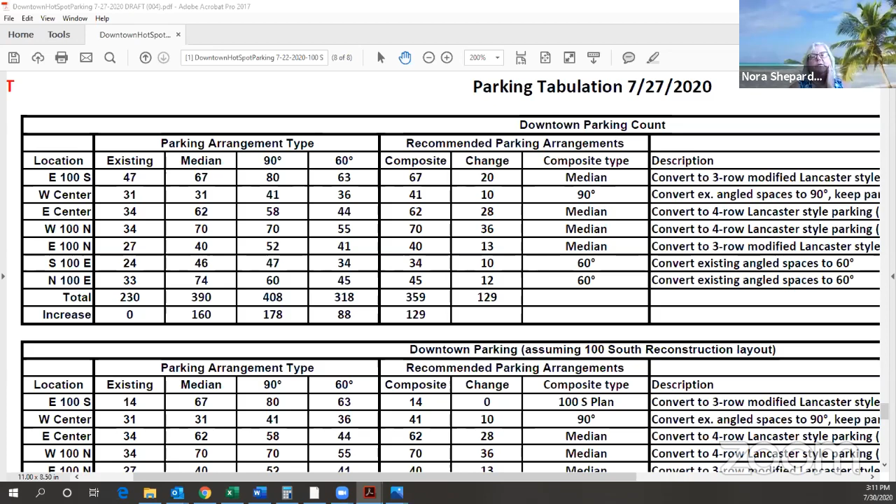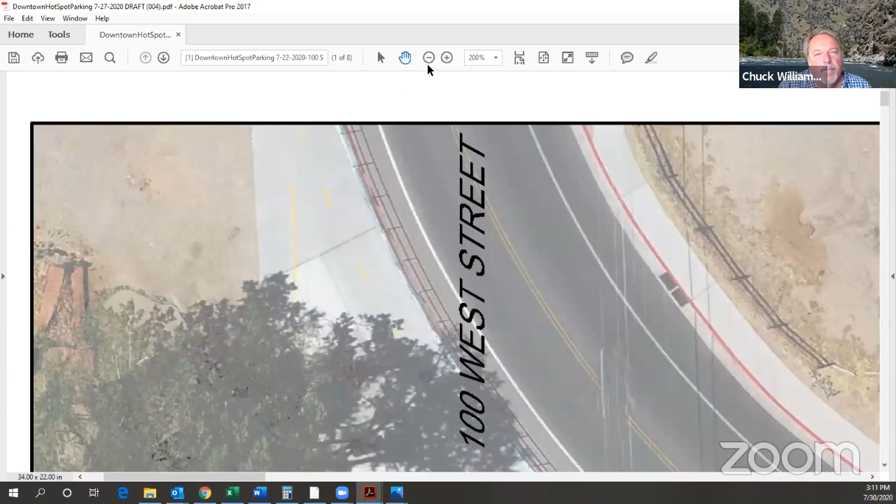Here's 100 South, Chuck, east of - we're still just seeing the parking tabulation chart. Oh, okay, I can fix that. Thank you, Nora. I have too many windows open. My apologies for that.

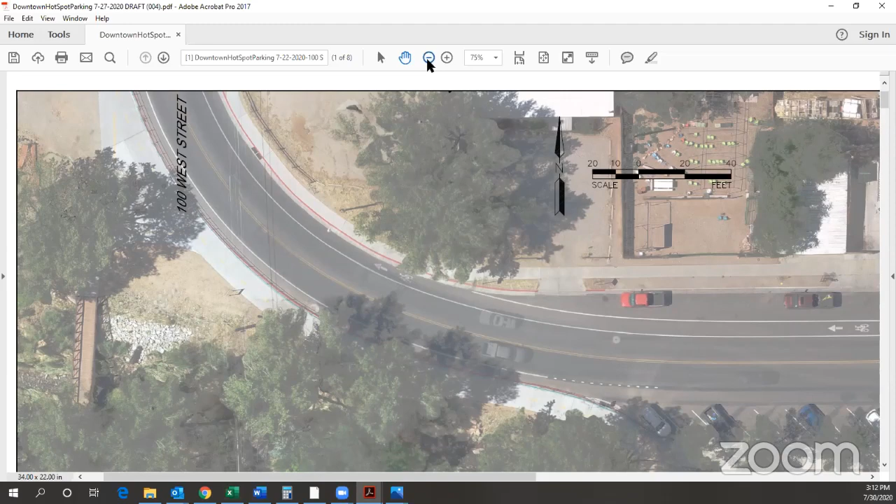What do you see now, Nora? It's the 100 West Street corner. 100 West to 100 North, or 100 South to 100 West. Great, thank you.

So now you can see this is 100 South, where I'm moving my cursor at Main Street, east of Main Street. The thing I'd point out, as we've discussed before, is here's 67 feet, basically curb to curb, which is one of the limitations on the existing conditions, and these streets vary as we've talked about before.

But we tried to maximize. We left this area free and clear for turning movements, ended up with median parking in the middle. There's not a lot of driveway conflicts here, which is a good thing. And then parallel parking on the north side of the street, and there's a setback from the crosswalk here over at 100 East.

Chuck, that 12-foot dimension for the drive lane, is that from the lip of gutter, or is there any shoulder between that lip and the lane? It's lip of gutter. Yeah, and I'm okay with that, I just wanted to clarify.

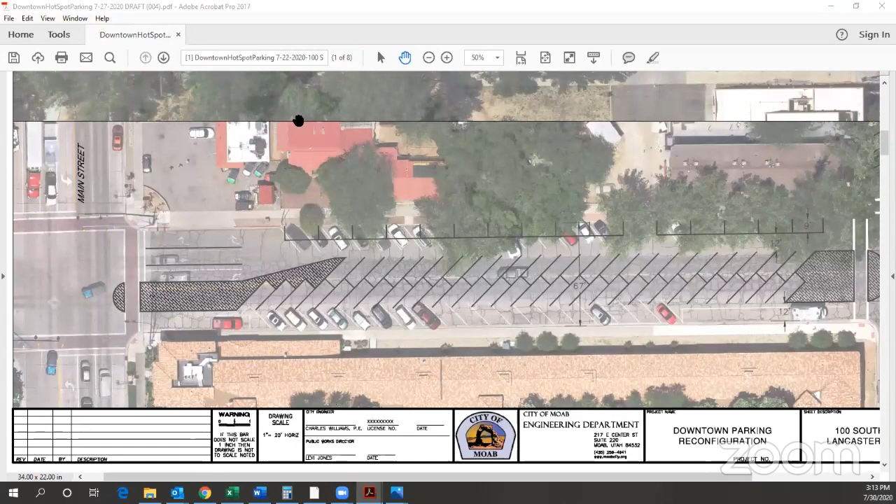And is the setback from the crosswalk to the east for any particular reason? Yeah, it has to be 20 feet per state code. So Chuck, are you taking the parking off of the south side of that street then? Yes, in order to make it fit, because of the 67 feet, there wasn't any room for anything else without going in and moving curb lines.

And on this side of the street, this is the Greenwell Inn, that'd be very difficult to do. And I'm not sure there's much opportunity on this side, but we were going to look at that if we continue moving on this, if you'd like us to.

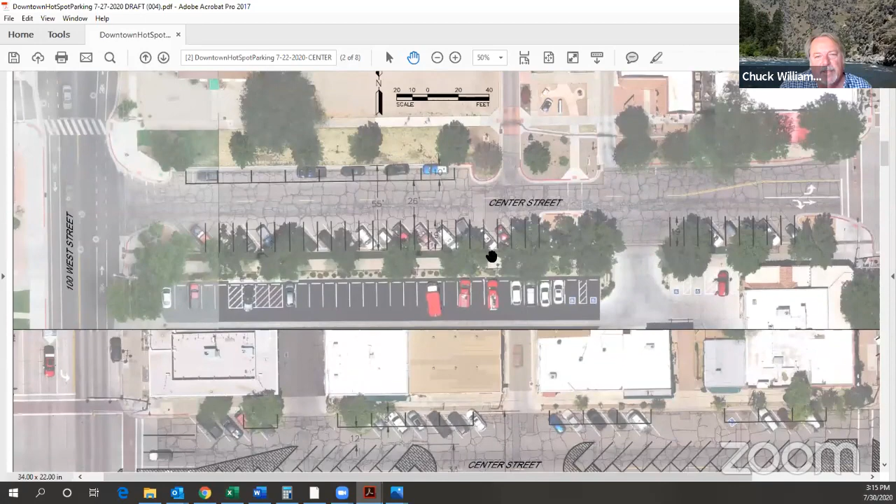The thing about 100 South is that we have currently designed an infrastructure project that is storm drains, sanitary sewer, culinary water, and green infrastructure. And so we looked at, I think I included that. I just want to explain it to you. That's what these sheets are down here that look a little different than those other sheets.

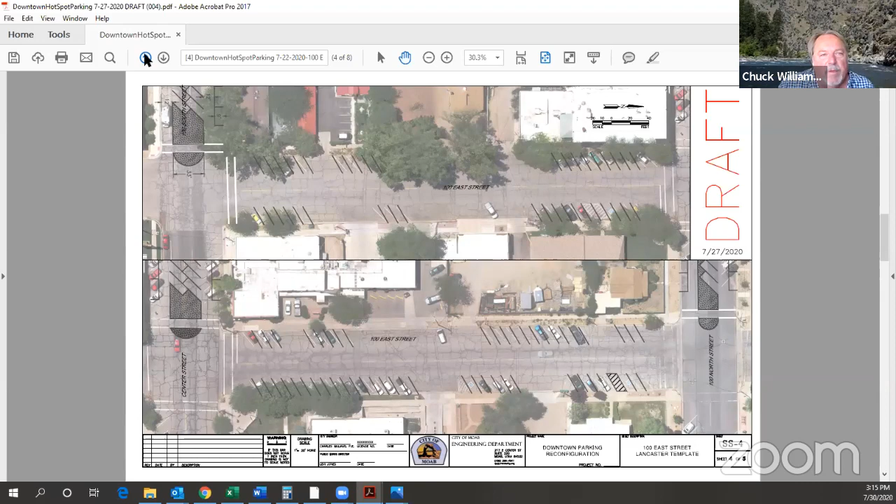These are our 100% design plans for the 100 South reconstruction. And if we went with that alignment, which had some bulb outs in it and some, at that time, back end angle parking, but it could easily be front end angle parking now, we get a different number of parking spaces is kind of what I wanted to point out. I'll go over those in a minute, but that's why there's two different scenarios here, assuming the 100 South reconstruction layout on the parking tabulation and not assuming the 100 South parking tabulation.

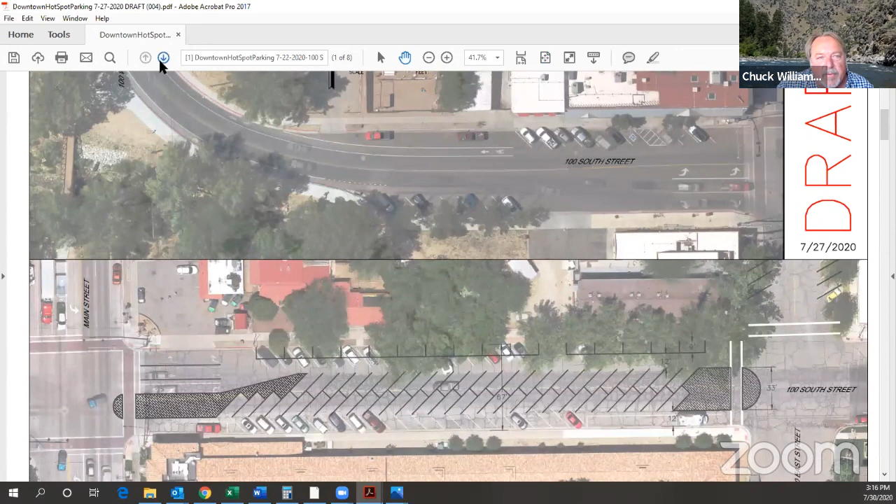So back to where we were, here's 100 South, I'll go back here. Here's Center Street, this is West Center. We went with perpendicular parking along here. Here there's only 55, 56 feet curb to curb, as existing angle parking. This part is very similar to what Matt did, went with the perpendicular parking over here, I believe, and parallel parking over here.

We talked about it, looking at seeing if some of this park strip could be used for angle parking or perpendicular parking. When we looked at it in the field, the roots seem pretty shallow, I'm not sure, there's irrigation systems, we haven't really overlain all the utilities yet. So at this point, we just put in parallel parking there for that.

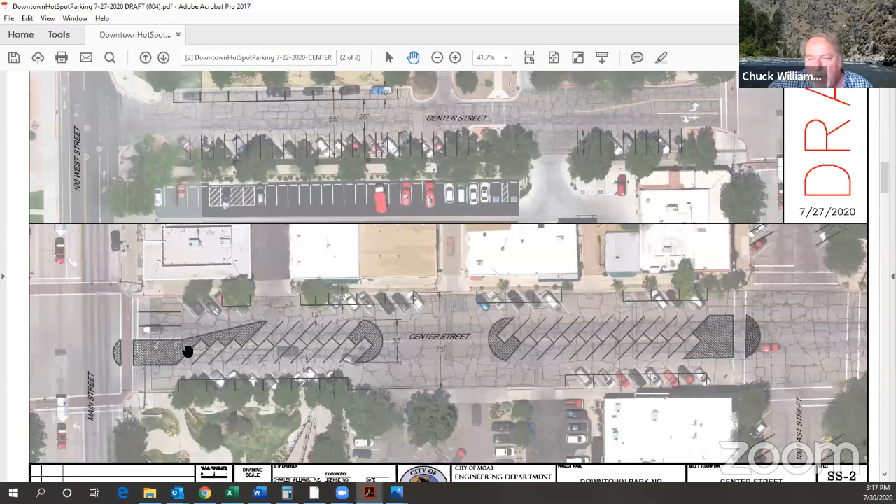On East Center, again, the setback on this side for the turn lanes. This has median parking down the middle, parallel parking on the north side, some parallel parking on the south side, but on Center Street, as a matter of practicality, this is the MIC.

I just don't see how we can avoid the fact that we need openings here. Not saying we physically couldn't do it, but I think from a traffic flow standpoint, making every vehicle that goes in here—and this has travel trailers and that—and then having them come out and go right, is something you just need to make decisions about, I guess.

But go ahead. I'm wondering if, as a compromise, the left island, the western island east edge, could be moved east a little bit, so that the MIC basically has two driveways for that parking lot. I'm wondering if the eastern driveway, which could be more the exit one, could have a left turn, and then if people happen to pull out of the western driveway, they would be forced to turn right, but presuming the traffic allows it, they could just pull a U-ey in that spot and pick up another 4 spaces that way.

It's possible, Kaylin. Again, these are such large driveways, plus there's that driveway across the street that goes back and serves the back of these buildings. We believe this is a significant feature we shouldn't ignore, because one of the issues is none of this has raised curbs. So these are potentially some type of pavers, so cars can cross it. There's nothing, so if you don't provide them a travel way, you set up conflicts where someone could drive out here and turn left right there. I'm not saying they would, but it's something you've got to consider.

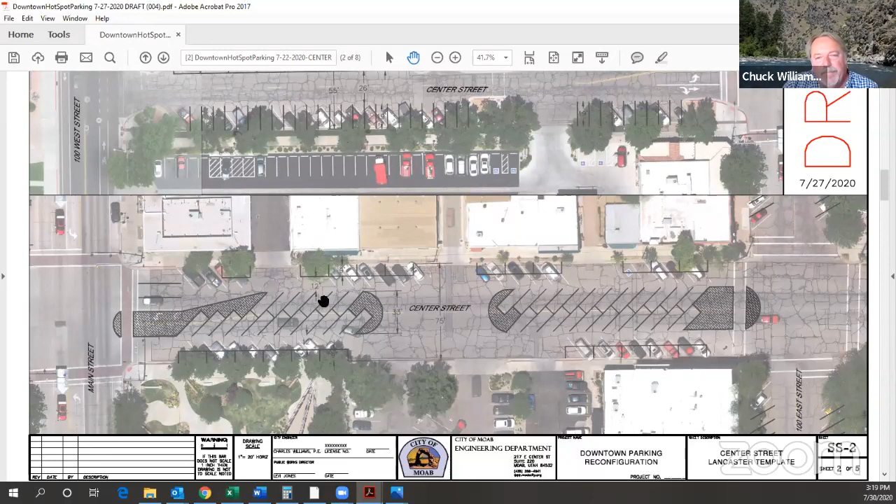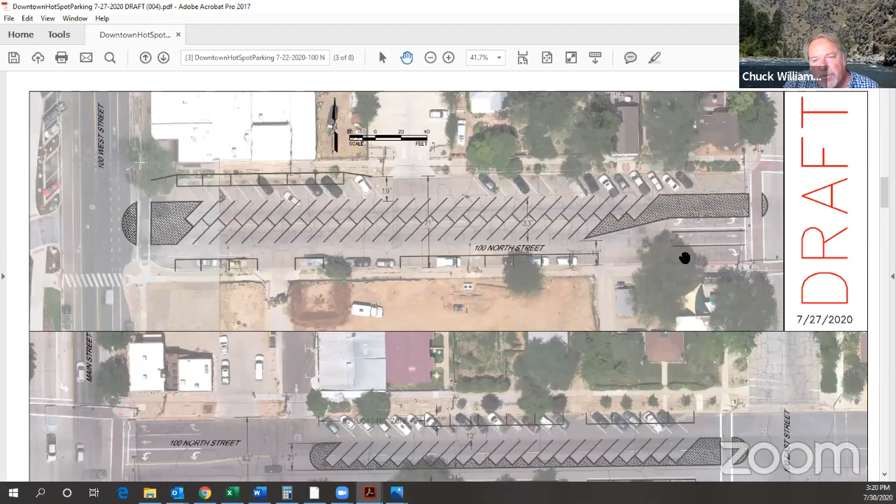Now down to 100 North Street, and this is 71 feet curb to curb. This is where we pick up a lot of spaces compared to what's there today. Here's 100 West, so this is West and 100 North. Pretty much the template fit of just angle parking and the median parking, parallel parking here, parallel parking here. You can't really squeeze in any parking here because of the turn bays, which I believe need to continue.

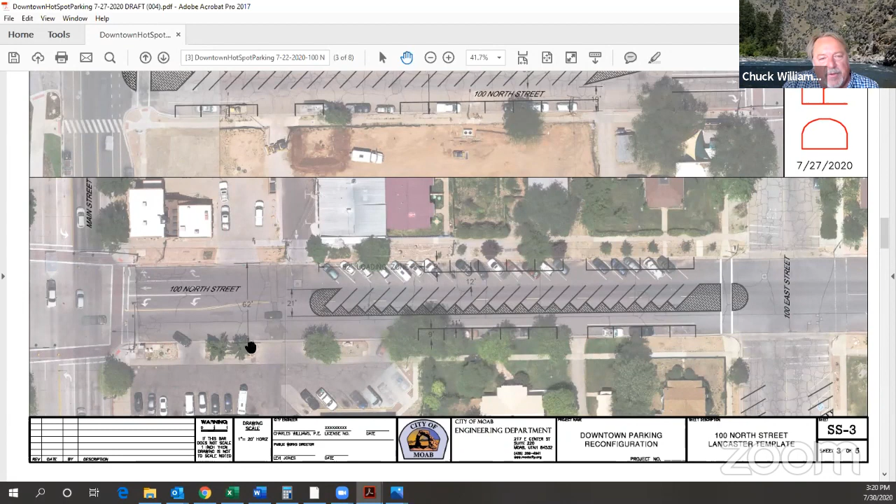Down here, 100 North on the east side, and there's only 62 feet curb to curb. And that's one of the limiters. Here's 71 feet. So when you cross Main Street, you can see by this taper here, the curb to curb shrinks by 9 feet. So there's less opportunity under existing conditions to put in parking.

Given the way we've had discussions about deliveries and how those are best handled, we thought maybe making this a loading zone might be a good thing to do for Moonflower, because they seem to get so many deliveries at that location. Then put in a single row of median parking down the middle, and parallel parking along the north and south side. But because of this 62 feet, we just couldn't fit in the full width of the double, like up here, the median parking.

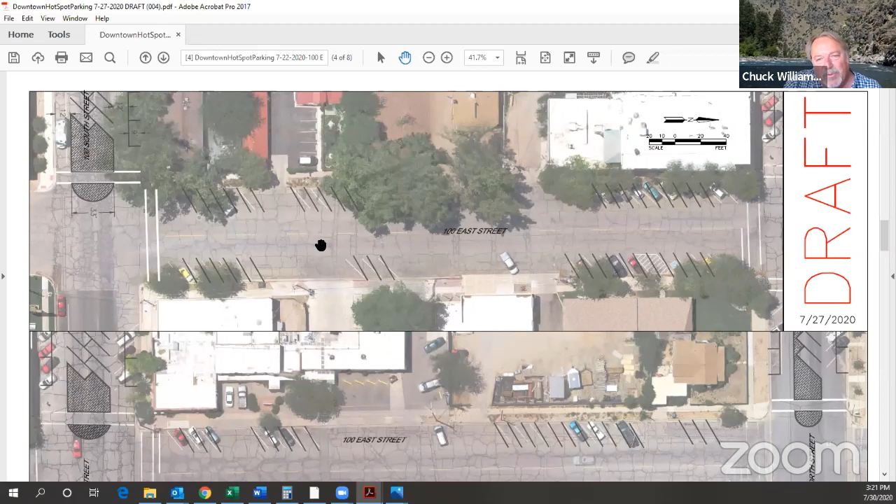Now this is 100 East Street, and here I believe this is the firehouse, isn't it? Yeah, and so these driveways are a limiting factor over here. So we went with angle parking forward, 45 degree, which gives you a little bit more space than the 60 degree. Then down here, Center Street, 100 East, angle in parking down here.

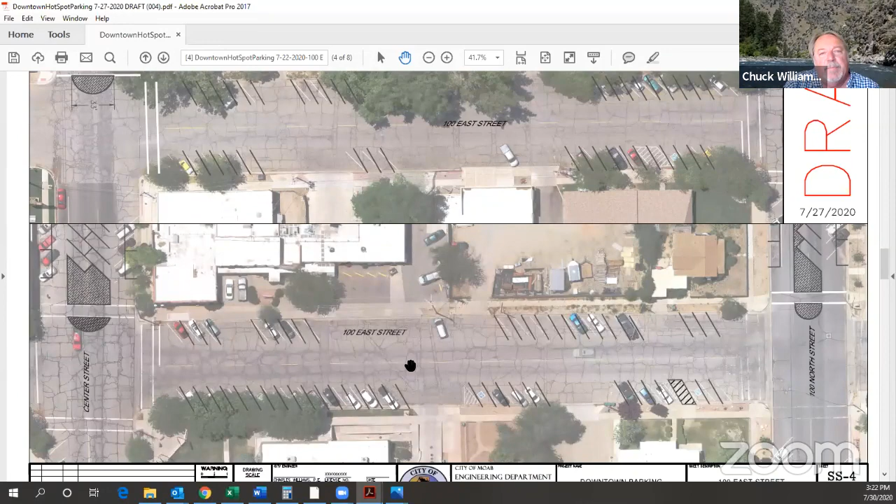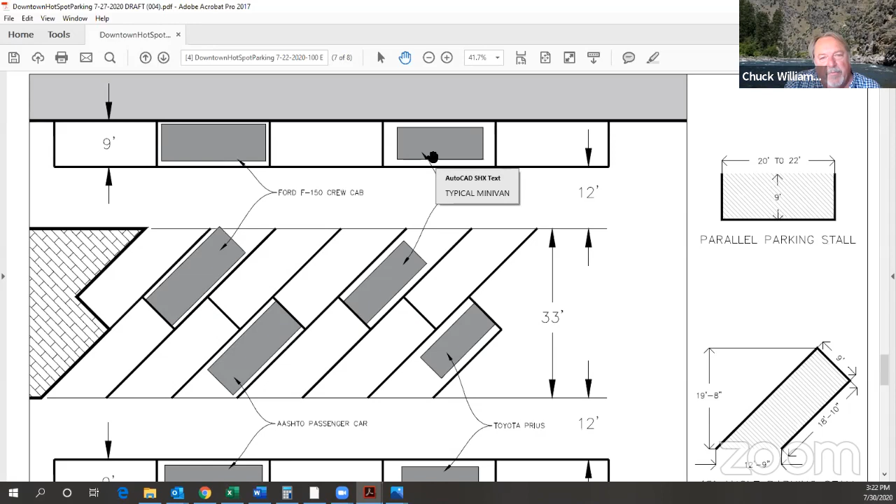So really we went at it on a case by case basis, street by street, and I'll go past that, and came up with... here's a couple of examples, and Matt has done similar, I know. A Ford F-150 crew cab, kind of the typical four-door pickup truck, will fit in this space and in this parallel space. Typical minivan looks like this, gives you a little bit more room over here. Toyota Prius, yeah, you've got lots of room. And then the AASHTO design car, which is kind of this nebulous car, probably a full-size car of some sort, fits in here.

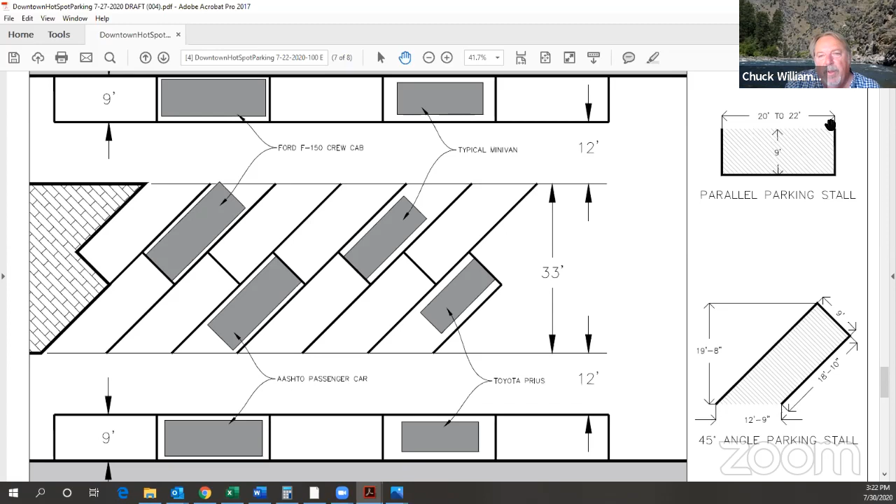Parallel stalls are between 20 and 22 feet long, 9 feet wide. The angle parking stall, 45 degree, is 9 feet wide, 18 feet 10 inches on this leg, and it goes out into the street perpendicular about 19 feet 8 inches. So these dimensions weren't evident on some of those air photos, so we wanted to point out some of our design assumptions.

So here's the tabulation that came up with it. If we focus on how this would read: here's the street, here's the existing number of spaces, this is if we just did median based on our assumptions, or just did 90 degree, or just did 60 degree angle in. But we put together a composite, which is what I just showed you. And this is the change. In all cases, there was a change in the plus.

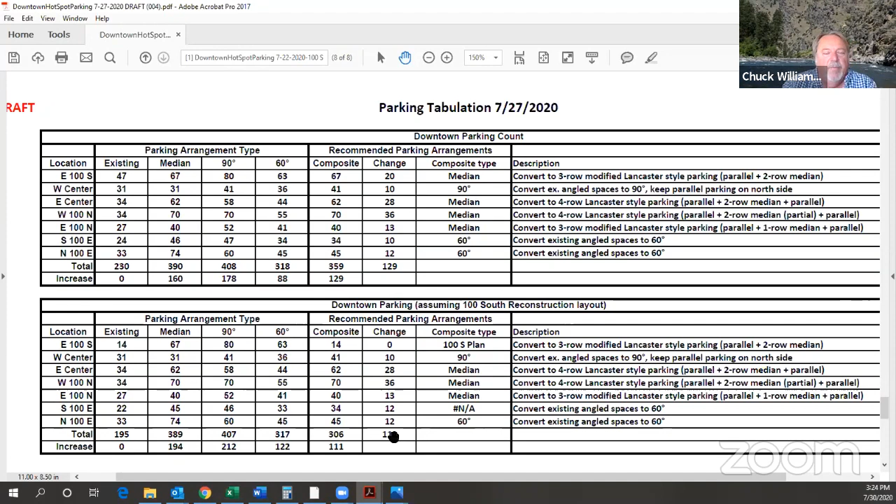If you go on a street by street basis, the one that picks up the most is West 100 North, picking up 36 spaces, for a total potential increase - let's say it is for the final one - but at least under this scenario I've just gone through, an increase of about 129 parking spaces on those particular streets. And if we were to maintain the 100 South reconstruction layout I showed you, the plans we have now, it would be an increase of 111, because the layout of 100 South doesn't pick up as many parking spaces as the exercise we went through above.

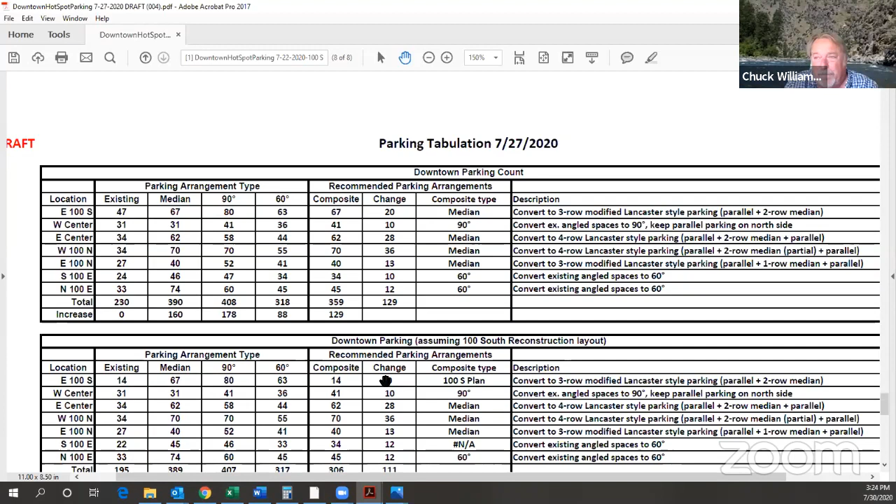So that's where we're at now. We haven't gone through as far as we intended to go by looking at moving curb lines, by looking at utilities. With that, I'd be happy to answer any questions if there are any.

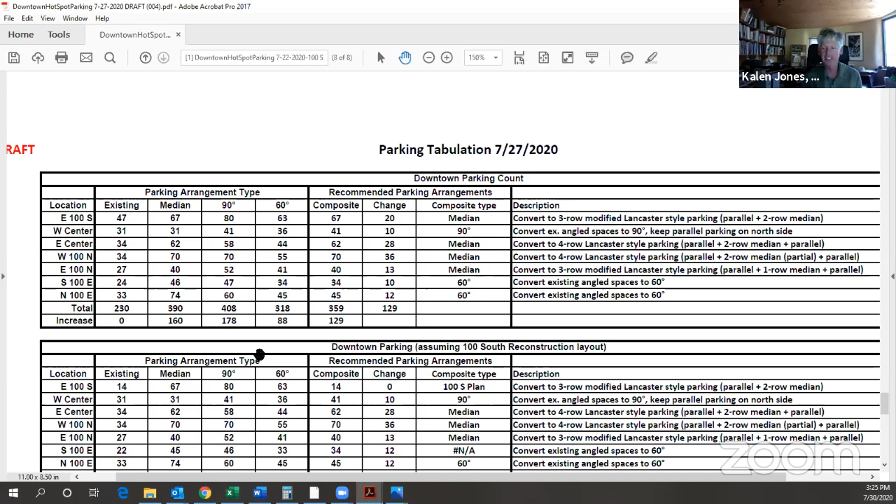Councilmember Jones: Thanks, Chuck, for all your work on this, and staff. This is great. One question about the 100 North in front of the Mark. Did you consider doing mid-street parallel parking? I ask because it seems like that could potentially be used as a loading zone.

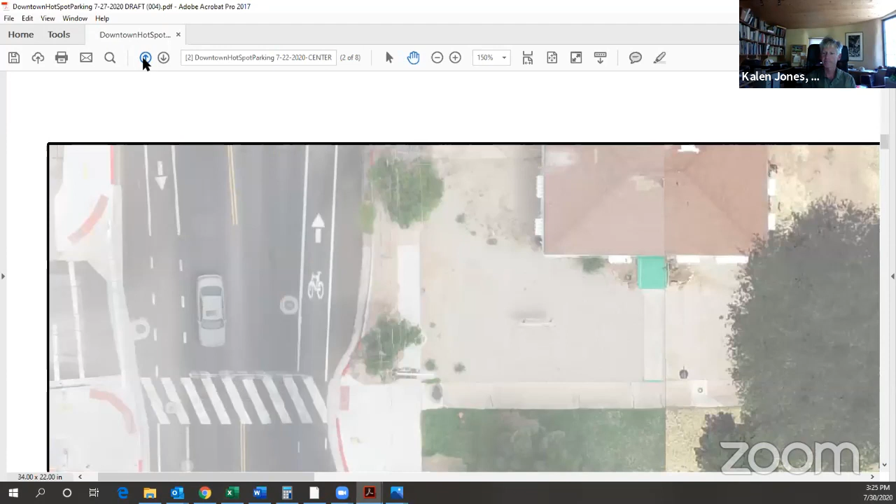Yes, we did consider it, and we didn't really throw it out, but the whole thing of car doors opening out into the street, we haven't really resolved that. Take the time to figure out those dimensions and where that would go, because it becomes almost a 90-degree extension of that 9-foot width, if you throw out the car door, for parallel parking. Not saying it isn't doable, and that's an interesting point, but we did talk about it.

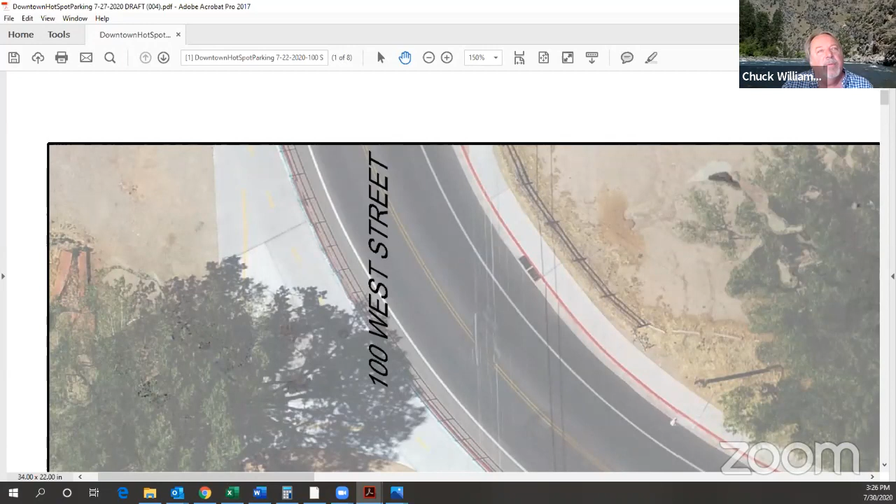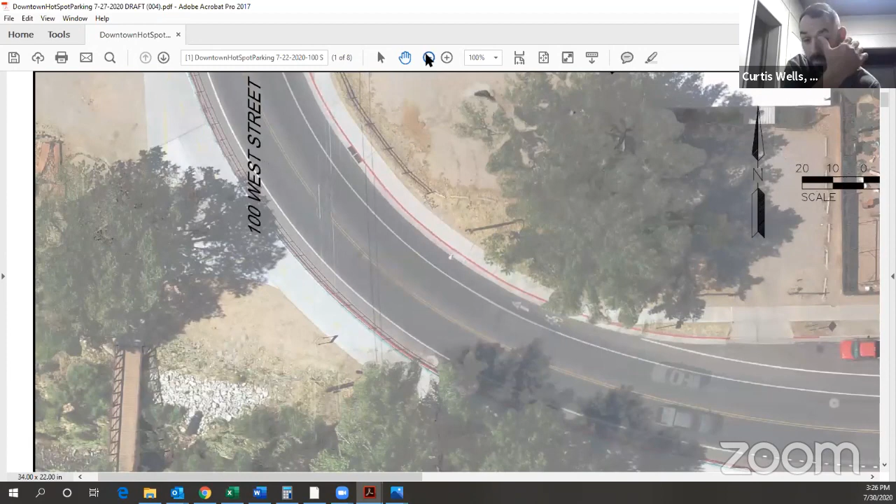I would echo that, Chuck. This is fantastic. Appreciate your work on this. Do we have another question? Yeah, I was just going to ask.

It seems like we've had some discussion about variation in parking stall width between cities. So when you were sizing these, did you take the available space and see how many you could fit? Because if you're working with a constrained space, they might end up being a little bit wider than some places' minimum, but there's no advantage to making them smaller because you might end up with a partial space on the end anyway. Did you go through a process like that, or how did you size this?

We absolutely did. That's why on width, we maintained a minimum width of 9 feet, but in some places we end up with 12 feet, because there's just that extra 3 feet, there's nothing there. And then we varied it between 20 and 22 feet in length, because sometimes there were limiting features, as you say, driveways or other obstacles that would say we can't pick that up. We picked up a couple of spaces by maximizing the length, minimizing the length on the parallel. But it's still, you're trying to make it fit into the box right now.

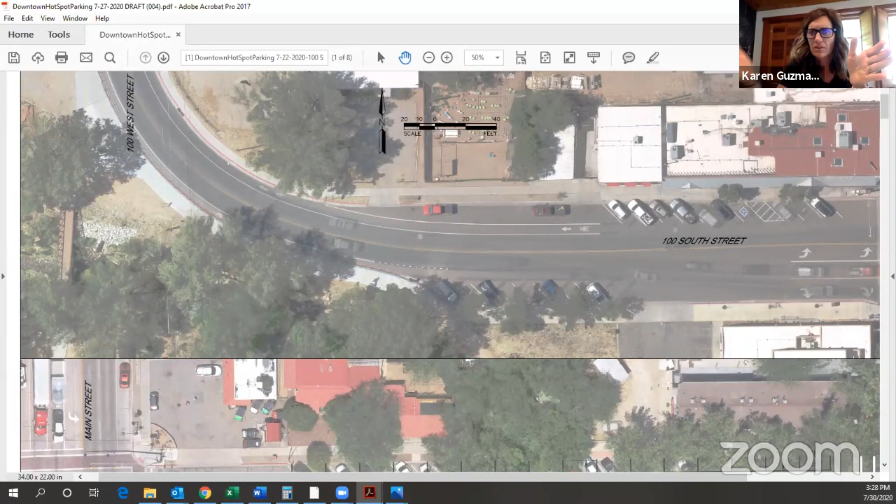Well, just real quick, Chuck, so do we go in front of the Mark? I couldn't really tell. It looks like it stopped before that. It stopped short on 100. Yeah, we only went to, is this 100 right here? On 100 North, you mean? Yes, Karen? Yes. Let me look. Here's 100 North, 100 West. Yeah, we just went up to the crosswalk that's there at this street. And the Mark is on the east of there. Okay, yeah, you're right. So we made an assumption that we basically went one block either side of Main Street.

But that's not to say that you couldn't extend it further up to pick up more spaces. Gotcha. I mean, there just seems like a high usage for residents. The Mark gets used quite a bit, and there's a need for parking. So bringing that up would be advantageous. And then on that 100 North, when we did our walk around on that first block on the south side of 100, we had all those, from the post office to the US Forest Service.

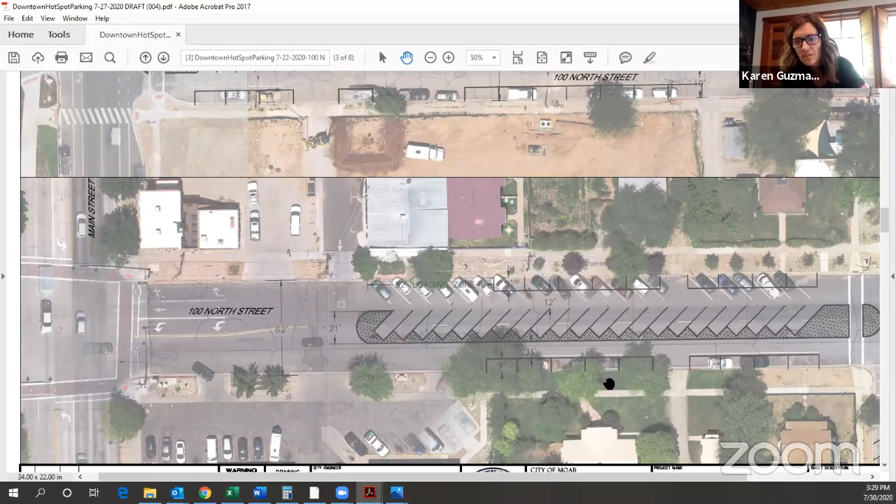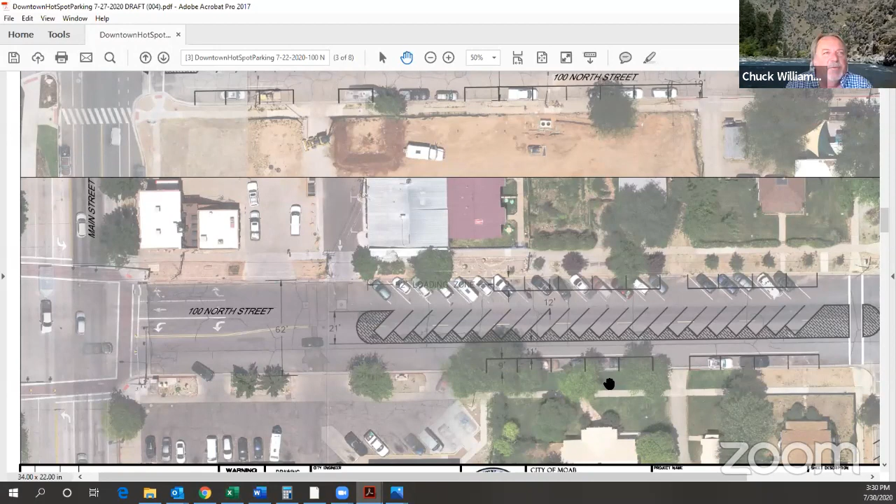Right, bringing, utilizing some of those trees to offer shaded parking without having to get rid of those. Are we going to look at potentially going in, like the same as with Center, when we did the walk around again, it looked like there was options to make that a little deeper, if we're so inclined. Yeah, this is still a work in progress. We haven't gotten to what I would call the 100% set. This is maybe a 70% or 60%. We've looked at a lot of the constraints now, and yes, we would, to answer your question directly, we'd be looking at that.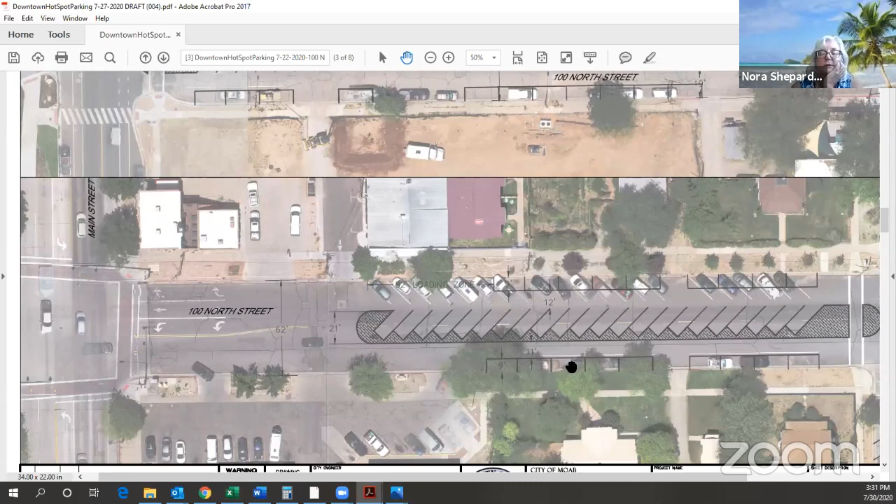Seeing none, thank you again, Chuck. Progress looks great. I definitely think the concept so far is in direct alignment with what the group had envisioned and a lot of the feedback we've gotten from the community. Appreciate the good work on that. With that, Matt, I will turn it over to you.

You're on mute, Matt. No, still muted. Nope. Hey, Matt, we're still not hearing you. Even when you're off mute, we're not hearing you. Maybe leave the meeting and come back in. I've had issues with that where that addresses it. Okay, Matt has left. Watching for Matt. Matt is back. No. Not sure what's going on, Matt. We're not getting you. It's showing that you're off mute, but is there a chance you can adjust your microphone volume level? Yeah, that's what I was thinking. On your computer or whatever you're using.

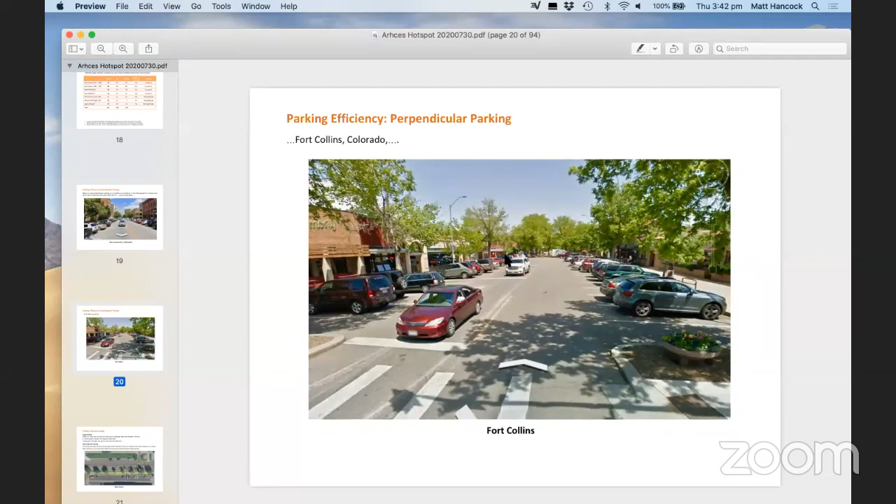I just wanted to touch quickly on perpendicular parking. It's been a while since we last met and I last spoke on it. It's widely applied in other countries I'm familiar with, and also in the United States. It has certain advantages - perpendicular parking can be accessed from both directions. Currently the angled parking on West Center Street can only be accessed in the direction of travel, coming from the west to the east, not from Main Street. Perpendicular parking would help remedy that.

The other advantage of perpendicular parking is it uses a lot less street length. It's very efficient, and it's quite well suited to this location, given that it's a low volume, low traffic street, and it's naturally bordered by these two necks, this neck here and the mid-block neck there. As Chuck has mentioned, we do have this issue with this parkway, this green parkway to the north, and whether to recess the curb or not.

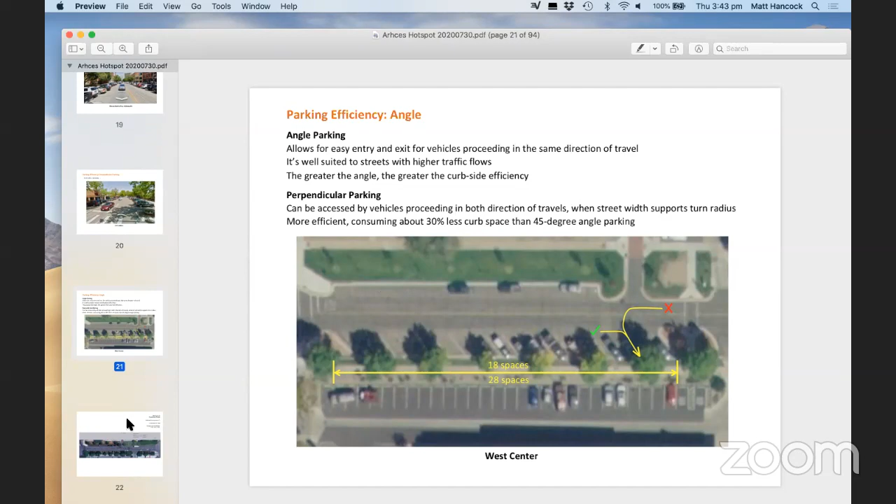If we did recess the curb, we'd increase the amount of additional parking quite substantially. So I sent through, as part of the submission, the PDF files. They're a bit awkward to work through. I'm not sure if you'd prefer me to go to the SketchUp files. It's a little easier to navigate, but it might just be best to stay with the PDF file.

Can you all see that? I can't. Yes, you're going to have to give a thumbs up. Great, thank you, Nora. Thank you, Karen.

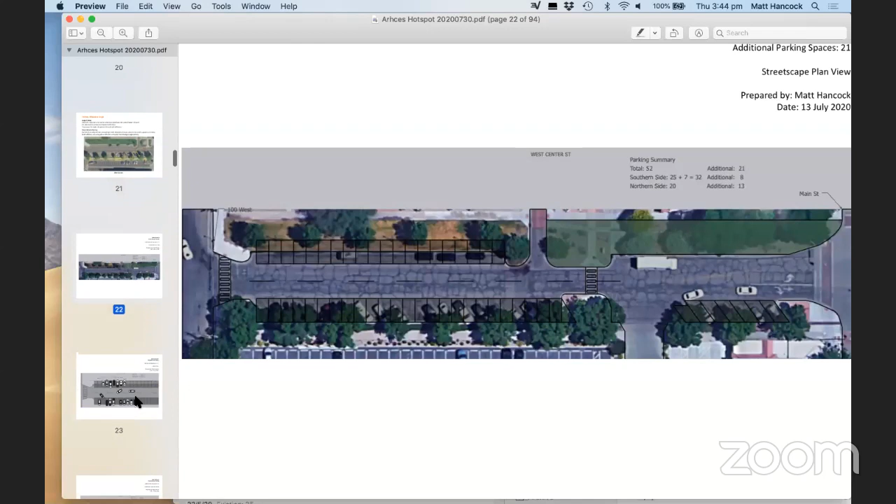It's all quite well spaced. Chuck has looked at a number of vehicles. We imported a number of different vehicles into our model. This is a Ford F-150. We looked at Ford Explorers, and we did this for all of our streets just to get a good look at turning geometry and spacing.

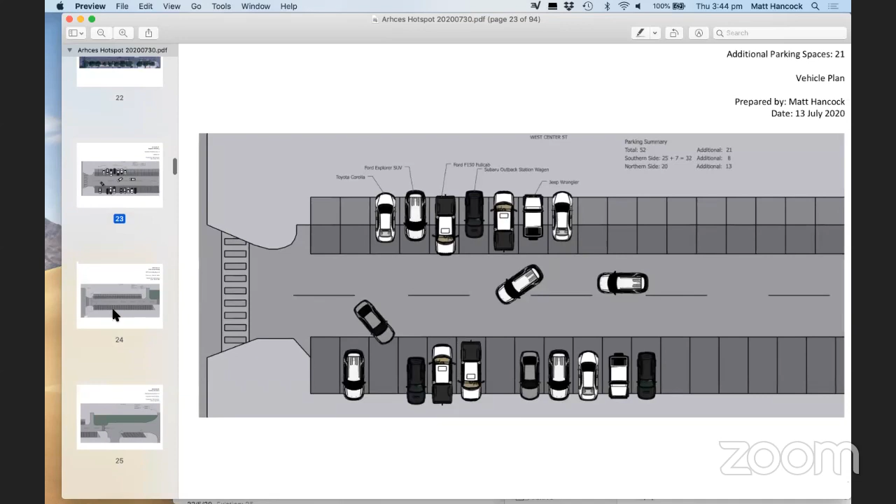And I'll move through this quickly. In fact, I'm going to change and go to the model instead, it's much easier.

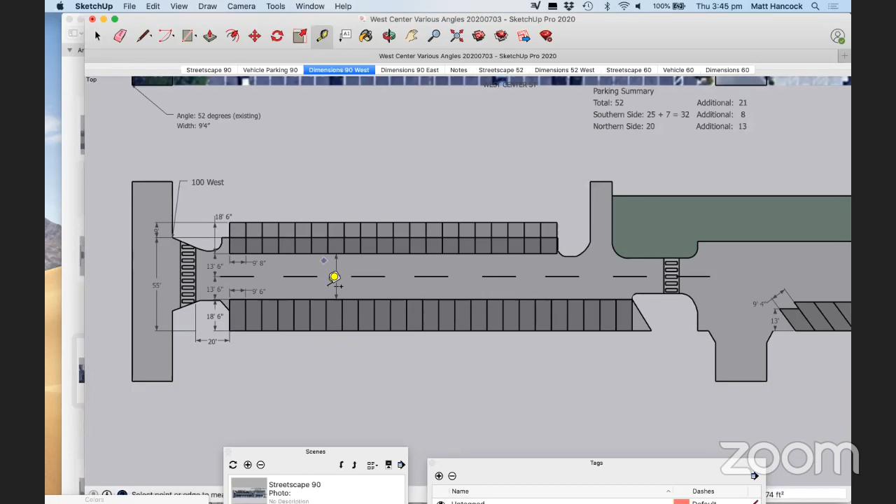So what we'd be looking at in terms of perpendicular parking, we were able to fit in a number of additional parks on the southern side using generous spacing of 9 feet 6 width, length of 18 feet 6, which is larger than the city code, and a distance between those perpendicular parks of 27 feet. Based on roughly these dimensions, we would have to recess the curb on the northern side by about 9 feet, which would all add up to an additional 21 car spaces.

If we were to tighten these dimensions up - 9 feet 8 on the northern side, 9 feet 6 on the southern side - and reduce those down to the minimum code of about 9 feet 1 and 9 feet, we get an additional 2 spots, for about 23 spots total for West Center. It would require recessing the northern curb by anywhere from 6 to 9 feet.

Chuck has mentioned this northern parkway that sits here is very uneven. It's quite elevated. I went off and inspected it - it's about 2 feet high, and those trees would be impacted by any recess of this curb. That's problematic. I value trees. I think we all value trees.

I'd like to see if we can't preserve the trees, but I'd also like to explore moving those trees. I did a little bit of work, and apparently transplanting trees isn't too big a problem in some instances. I'd love to see if we could do it here because the benefits would be substantial. So that's West Center Street.

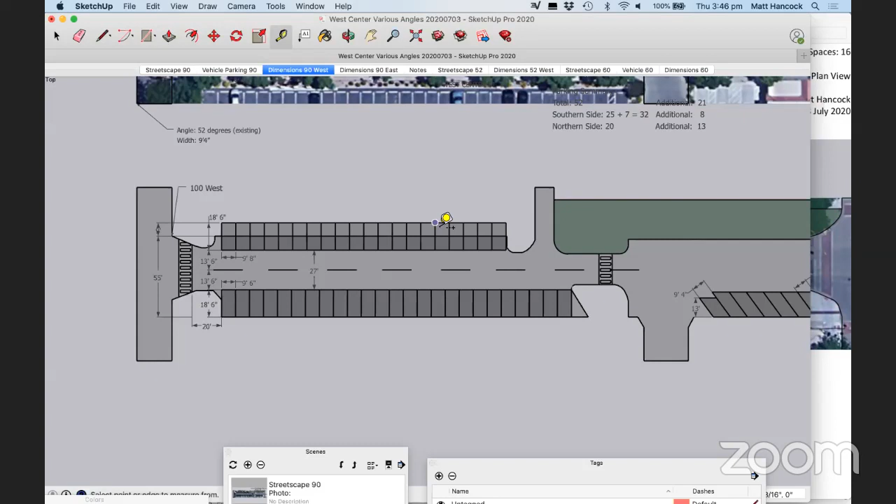It's a bit hard to talk because I can't get feedback. Should I unmute and get comments, and I'll stop speaking? Keep going? Keep going. All right, okay.

So that's West Center Street. I'll now move on to East Center Street. Actually, before I do that - I sympathise with Chuck, when you've got a lot of windows and you're trying to navigate your way through this, it is not easy.

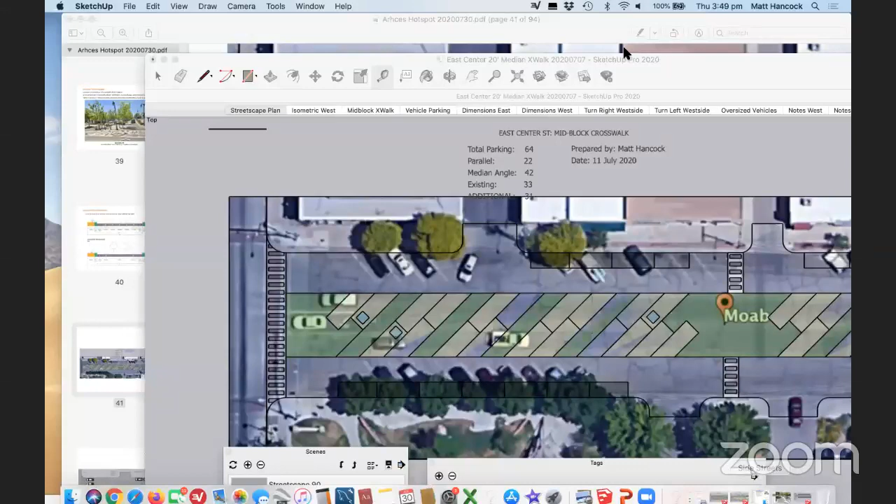I'll now flick back to SketchUp. For those who weren't in the subcommittee meeting, SketchUp is a drawing design software used principally by architects. It's really easy because you create 3D models, and from there you can just drag things around. It's great, really easy to draw things with this.

So just to give you the layout, anything that is a yellow box is a parking space. Anything that is green is a void, a landscaping or pedestrian void, not dissimilar to Lancaster. We have curb, and then we have the double end-to-end angled parking in the middle of the street. We have these voids for, if you were interested in doing landscaping.

My computer will think for a bit. These files are large. You can landscape. It's got a mid-block curb while it's thinking, and it's got parallel parking to the north. This is all very similar to what Chuck's done. I apologize for the wait.

Now, Chuck has mentioned problems with landscaping, and I acknowledge those - you've got amenities that run under the street. You do have to make sure that anything you put in the street is not going to create ongoing problems with the street itself. And of course, these are just my renderings of taking some really big trees out of a model and plonking them all in. This isn't to say what it would look like, but it is to give a sense of space and a general understanding of how things would look.

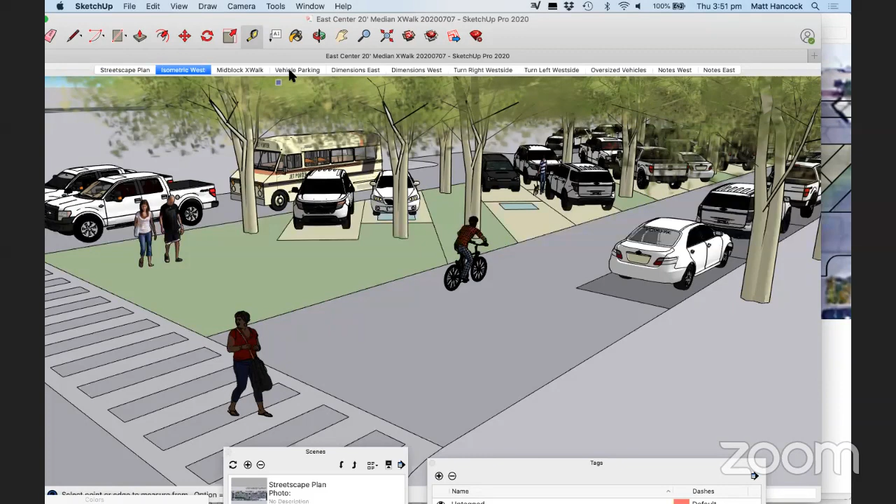In terms of vehicular spacing, it's really generous. Here I've put 2 full cab F-150s end to end - they're accommodated no problem. And here you have SUVs. You can see the amount of space that exists between these. As I said, it looks a bit congested when you see it all together, but it's very generously spaced.

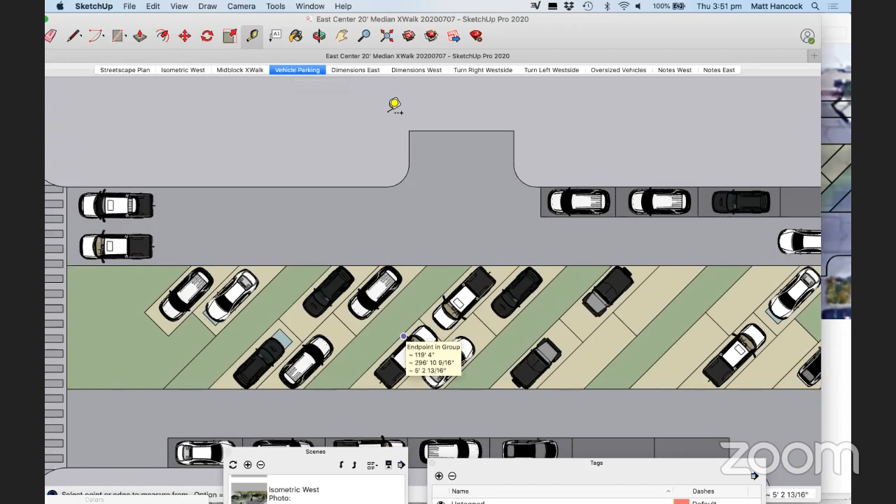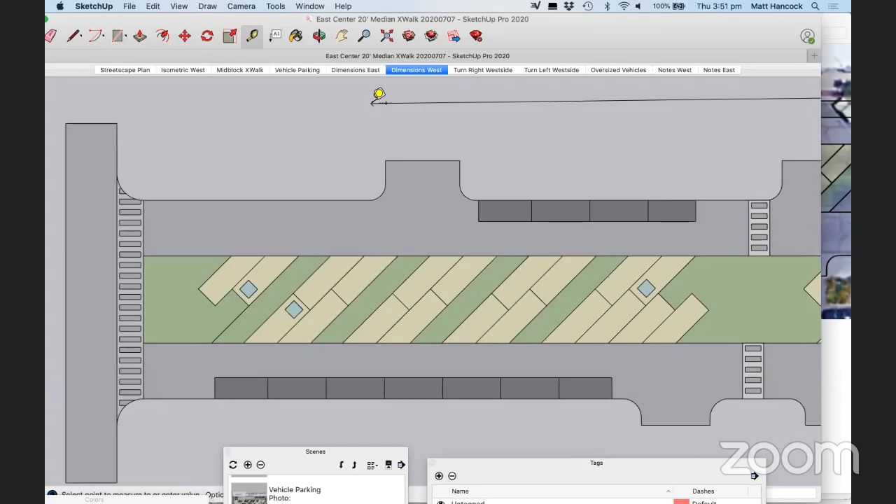In terms of dimensions to the east and the west - this is getting more technical, probably more for UDOT - we've got parallel parks in this example with the mid-block crosswalk between 20 and 22 feet. The depths of these all comply with the city code. These pedestrian voids are about 8.5 feet wide, and then of course there's capacity there for ADA vehicles. And as Nora was saying, we've got the parallel parks, which is great for parklets and changing the city code.

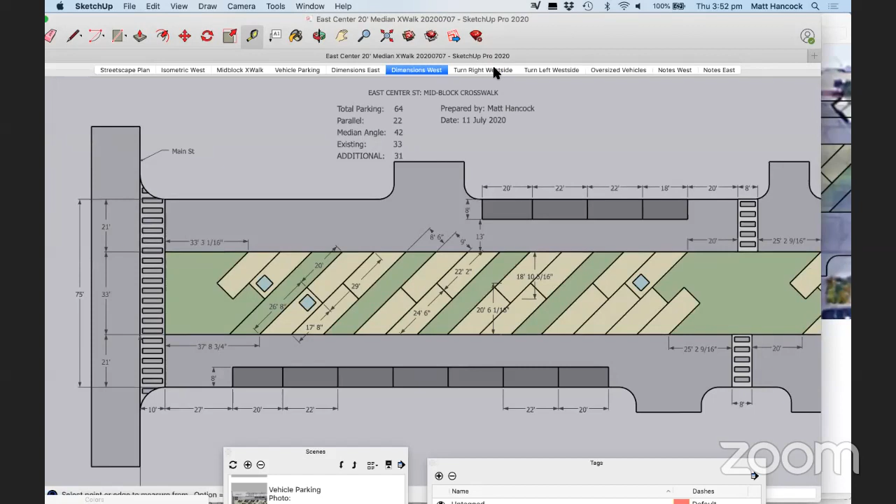So I'm not sure there's too much more to add to that - there's a whole stack of notes. One thing we did explore, and we were concerned about these medians and these travel lanes of 13 feet, 12 feet wide, is we looked at the ability of larger vehicles to turn onto these streets from Main Street and onto Main Street.

We looked at buses, we looked at shorter semi-trailers, what they call a WB40, which roughly has a trailer that's about 40 feet long - to give you an idea, that's roughly a Nichols food truck - and then a WB50, which is roughly a Sysco and a US Foods food truck. We really saw no issue with them being able to turn these tighter turns. Again, one of the great advantages of having the median all at grade, all level with nothing raised, is that these larger vehicles, through careful placement of street furniture features, can clear these turns while you're not designing it for those vehicles in general.

The problem of designing turns for larger vehicles in general is that you end up with more generous spacing, and that enables smaller vehicles to take turns at speed. That booklet I've referred to heavily, Achieving Multimodal Networks, speaks at length about the importance of keeping sizes not tight but not generous. They make a point that in urban settings these radii should be no more than 15 feet in width, and that travel lanes shouldn't be too wide either. So that doesn't seem to be a problem.

Thanks, Chuck. Yes, Karen, if I just refer to this Google Earth, we'll take a quick walk down Lancaster. This is a narrower profile section of Lancaster. You see it has parking here, and then this void, this space—I'm calling it a pedestrian void for want of a better word. In that spacing they've put a light, they've put a tree, and it would be up to any final design as to what goes in here.

It does enable this whole setup to kind of breathe and have a bit more of a mall feel, rather than having parking spot, parking spot, parking spot. This is one of the things I do love about their design, and it might not be applicable to Moab, it might not be well suited. No doubt design experts would have a good opinion on that, as would the community, council, and the county.

But it enables you to do something else. The other thing it does is provide flexibility in geometry for larger vehicles. In the mock-ups I showed, the width was 9 feet, but if you do have a larger or longer vehicle, it can encroach somewhat in a way that you can't with set geometry. So that's just one of the clever features of this setup. Does that answer your question?

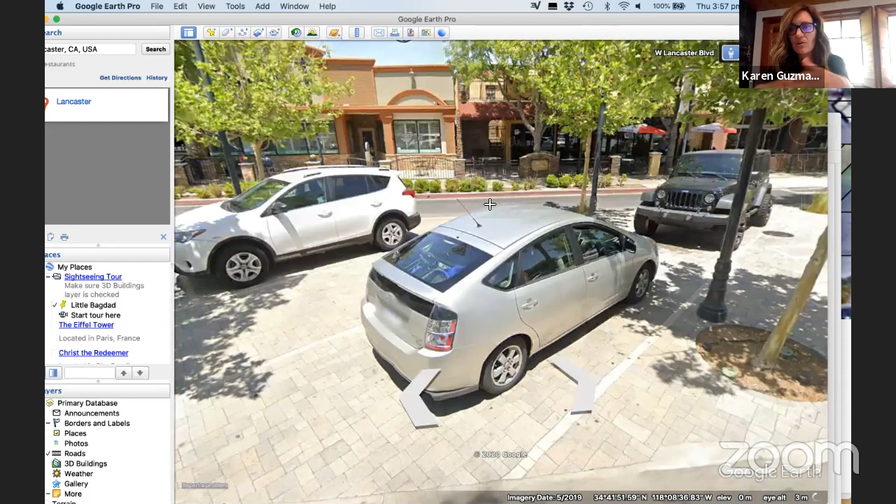Yes it does. But so in your count, those green strips were not counted as permanent? No, they're not counted at all. So there's that additional space there if you wanted to convert it to parking. And again, this all comes down to priorities—I'd imagine the community would have input, and as I mentioned, design experts, county council, as to what is prioritized.

I should probably mention further while I'm here, as in Chuck's design, he put that turning bay there, and indeed in the initial mock-ups I was doing I had exactly the same thing. That multimodal network book gave me the courage to start prioritizing pedestrians, and more of an understanding that the lanes could be narrower, the parking bays could be narrower. That booklet speaks at length about that. Like I mentioned before, the more generous geometry you put in for cars, the less it tends to support other road users, and that influenced my thinking quite a bit.

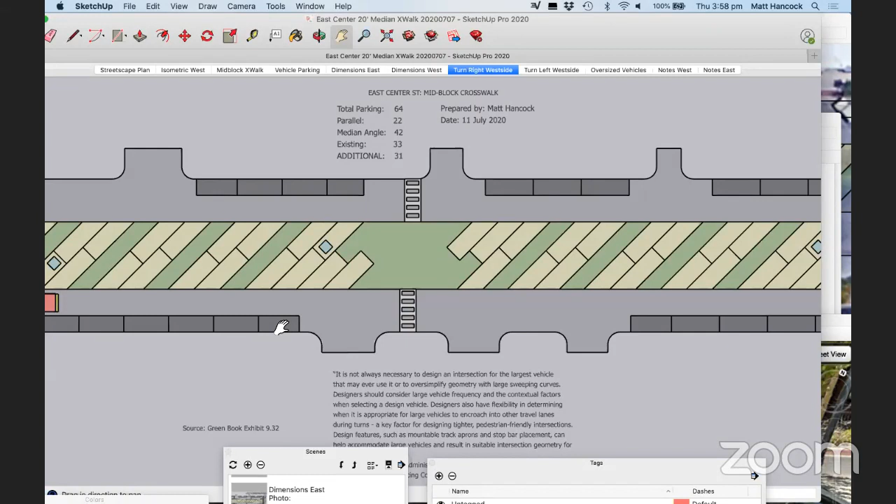So for example, these parallel parking bays are 8 feet wide rather than 9 feet wide, and that comes in large part from that book plus another code, the MUTCD code. So I decided to keep it more like Lancaster in the end, and if someone wanted to do a U-turn, to see if we couldn't accommodate it up the end. But that's a design decision.

As you can see here, if you didn't want to put a mid-block crosswalk, there's plenty of scope here to sacrifice a few spaces and maybe convert these, just like Chuck has done, and put in a turning bay. That's all detail. I think the important point is that the concepts work, and I think they work well in dramatically increasing the amount of parking on our side streets, and also meeting other needs within the city that would support economic development, for example.

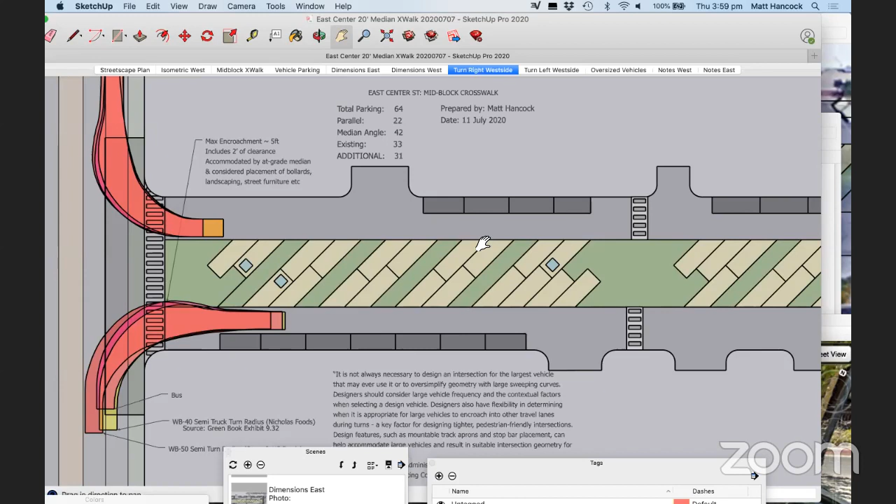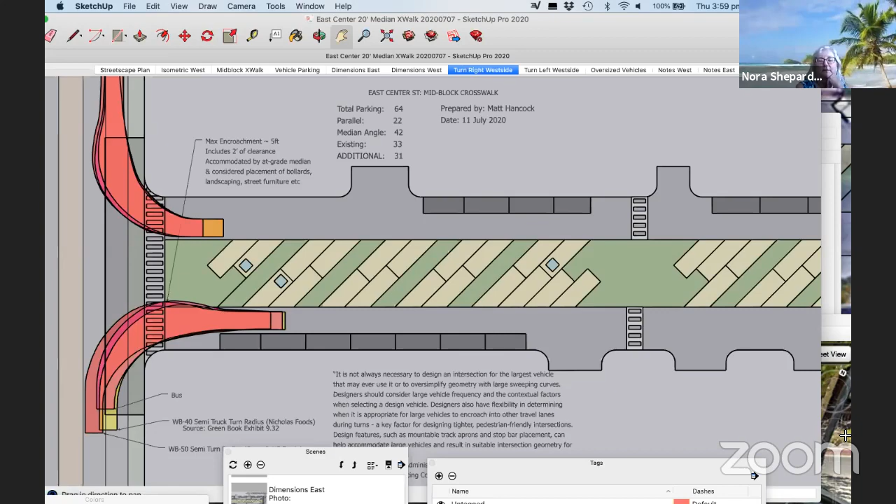I really like the green spaces, because even if you put pots with a tree in it—I don't know if the roots would cause a problem in the long term—but just having that vegetation and potential shade in the long run, I think will go a long way to make this really a pleasant experience, especially in our climate. I know that's an ongoing maintenance cost, but I personally think it's worth it in the long run.

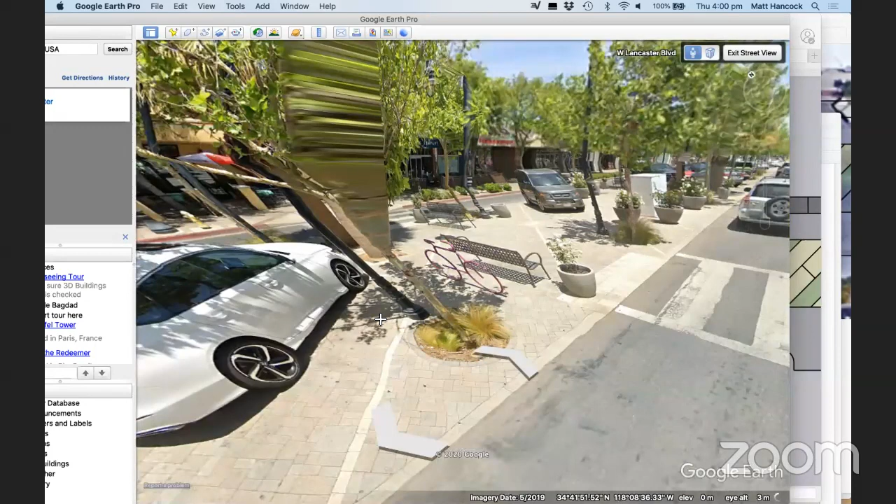Speaking more as a citizen, one of the things I think about these trees is they look great, and as I said, I value trees highly. This is fairly straightforward, it's just a tree with some nice grass. The other thing I like is that these are just pot plants, pots with flowers, so they're easily movable. If you decide you want to change their location, or trucks are taking a turn too tight, you can move them again. I think it's really clever, and the designers on this one have done an amazing job.

I'll also point out, because we'll probably go now to East 100 North—Lancaster has two profiles. They have a cross-sectional width of 70 feet, with parallel travelway, median, travelway, parallel, and that's for most of their street, which runs for 9 blocks. Then they have a couple of blocks which is just a travelway, median, parking, and a travelway, done to prioritize a wider sidewalk. So this cross-sectional width is 70 less 16, so it's not wide at all, and that's important for when we look at East 100 North, which we're probably going to have a look at now.

Any more questions or comments? It's best if I stay on the phone. No? Proceed, proceed.

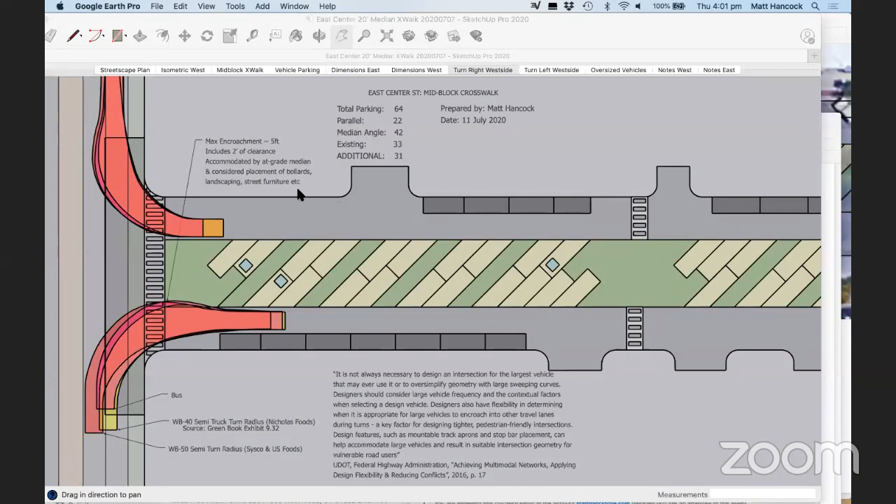So this is East 100 North, and it's a narrower street.

Matt, sorry, we're seeing your email box. There you go, is it gone? Yes it is, okay great. Okay, sorry, you don't want to see my email box, I'll close it. Oh no, hang on, it's on that—there we go, all right.

So there's East 100 North, just for orientation. This is Main Street down this end, here's Moonflower up here, same concept. I won't call it a problem, but the issue with East 100 North is it's a narrower street, it's 62 feet wide. As we just saw with Lancaster, they've managed to accommodate a narrower street, less than 62 feet wide.

I've included a mid-block crosswalk, again trying to facilitate as much pedestrian movement as possible. The other thing I like about taking the median all the way down to the street is trying to connect Main Street more with the rest of the street, because this seems to be a bit of a dead zone unfortunately, because it's got so much potential. Moonflower's this isolated corner, and I like the idea of connecting this.

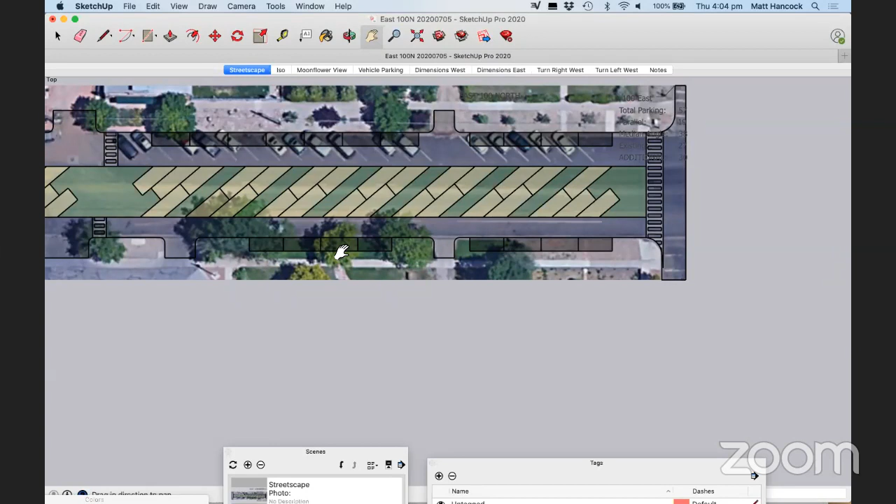We end up with this setup with an additional 30 car spots. That includes recessing this curb up here for 8 parallel parking spots. One issue with recessing would be drainage, but these spots could potentially be graded so that the original drainage channel continues along in its current location. Another issue would be trees—this tree might either be lost, or it might be moved, or it might be prioritized that the trees remain and we do with fewer parking spaces. Again, they're all final design considerations based on feedback.

The major issue with this, though, is turning, and I'll give you a perspective of spacing. It all looks fairly tight, but the spacing is very generous. I'm sorry these files are so large, I know everyone's busy.

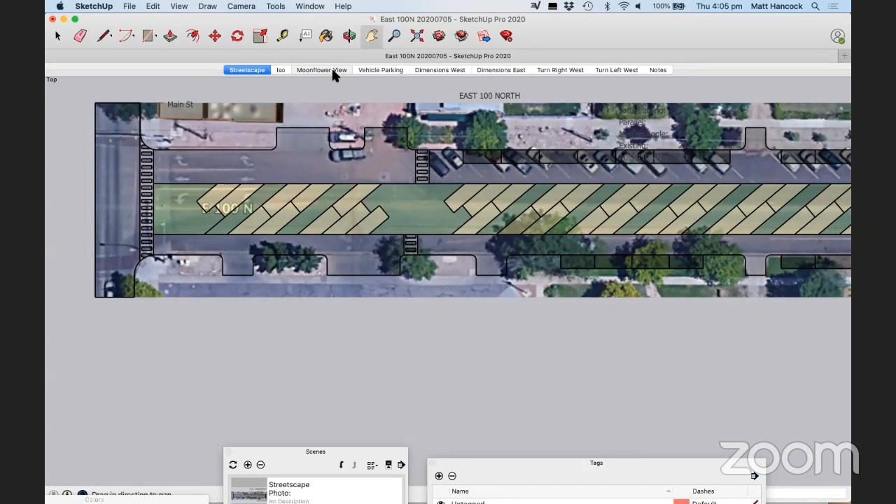So that's the type of spacing you're talking about, so that people get an idea. It's fairly generous, it's not tight. If you wanted to change all that to parking, you could.

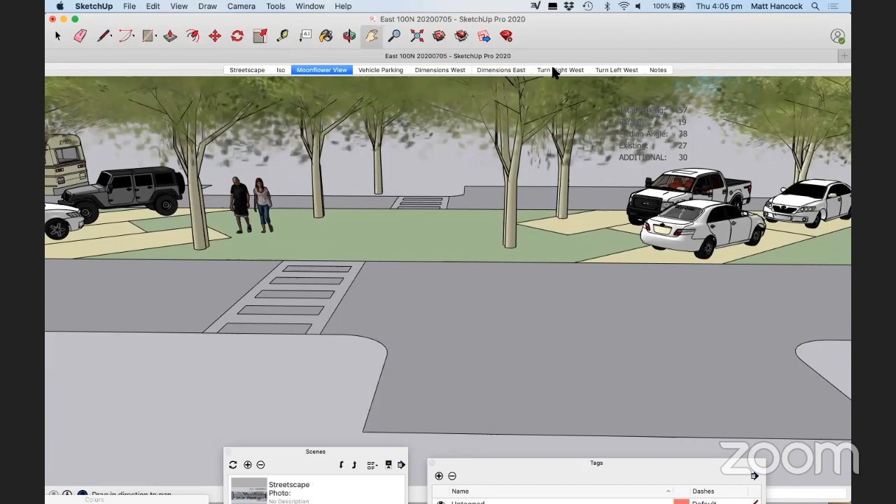But the bigger issue with this setup on East 100 North is the turns. Because this is narrower, because of this turn bay, you've got the curve here, and you've got this travel lane of only 12 feet wide as per Lancaster, it's going to be tight. In fact, it wouldn't be achievable for these oversized vehicles to turn right here without recessing this curb at the Main Street intersection. So that would be a problem.

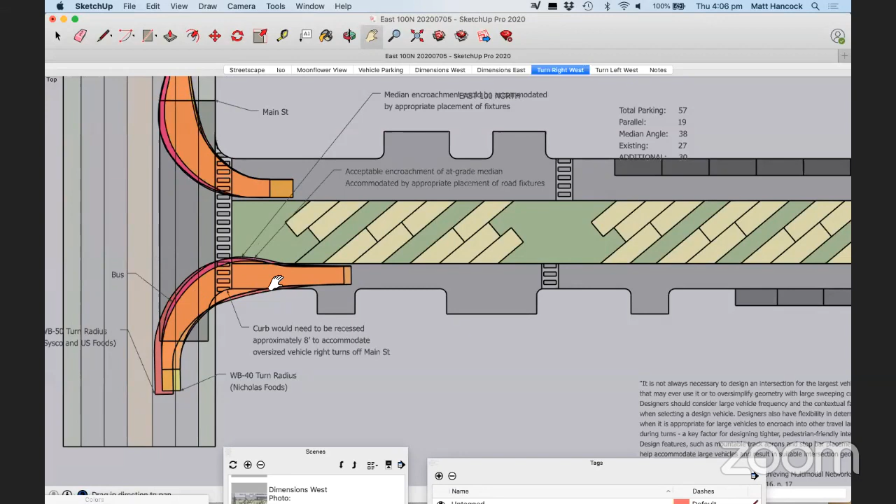Not to say there's not a solution, but that is the biggest issue I can see with this setup. And as Chuck went to just single parking rather than this double parking in the median, a narrower median, that of course would work as well. The advantage is you're not moving curbs, and you don't have to worry about these turns of larger vehicles. The downside is that you'd lose parking spots, but again, this is all prioritization. So there's that. Any questions with regards to that one?

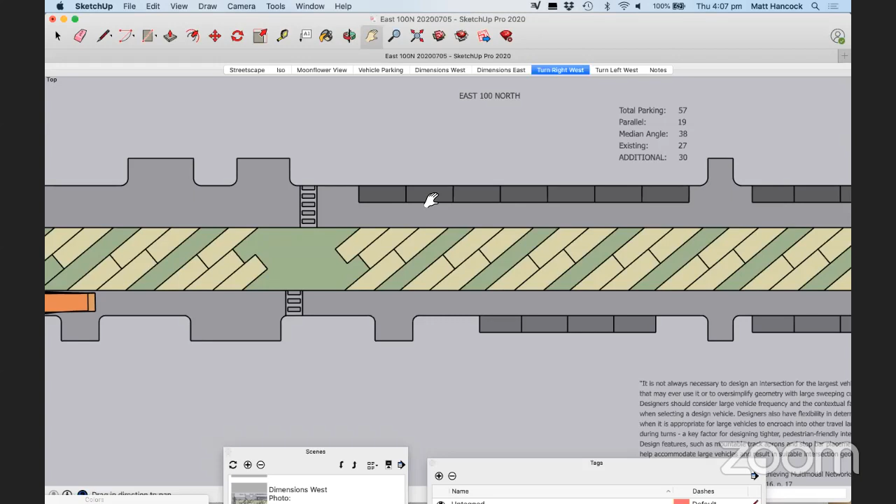I should also mention that with just loading zones, my thinking was influenced by other cities about making potentially timed parking zones, if that would be acceptable to businesses and delivery companies. Rather than sacrificing all this space, potentially, like we do in other cities, it's a loading zone between 6 and 10, that type of thing. And then it just becomes a compliance issue.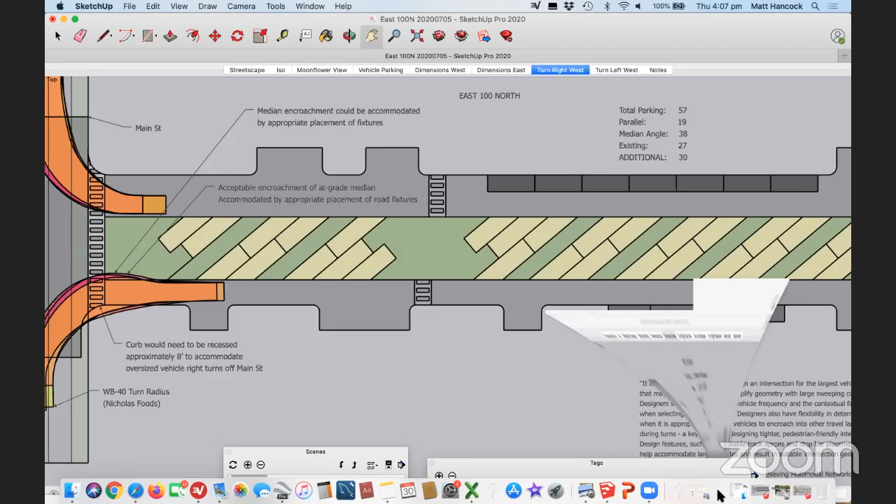So there's that. And then I guess the other big one to talk about is West 100 North. As Chuck and I have spoken of, this is the easiest to design because there's so little to worry about.

But I've included a mid-block crosswalk again. I have designs in the pack, as you've seen, without mid-block crosswalks. I kind of like the idea of a mid-block crosswalk, but you can see there's issues around spacing, etc. But again, it's exactly the same concept. It's turning here, the parking's recessed from the intersection.

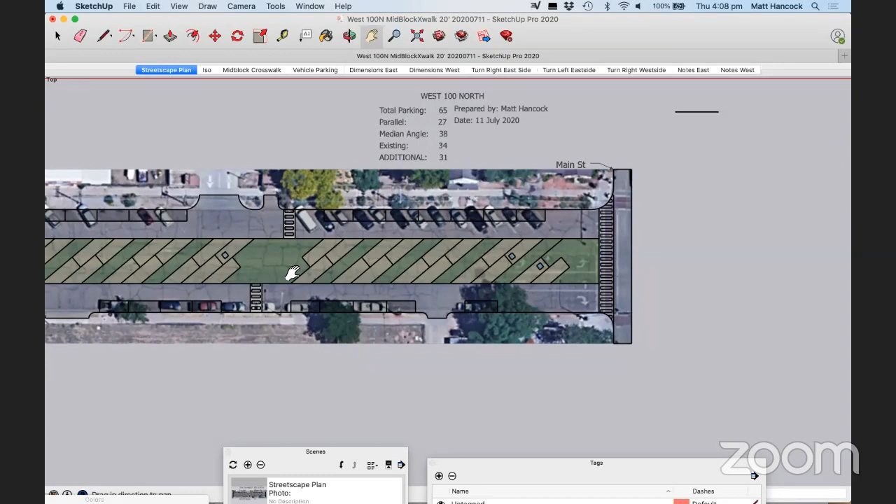You've got this parkway just like Lancaster fronting Main Street. You've got the 2 turn lanes. It's all very similar spacing. In fact, I think these pedestrian voids are even wider. So there's really not any issues there.

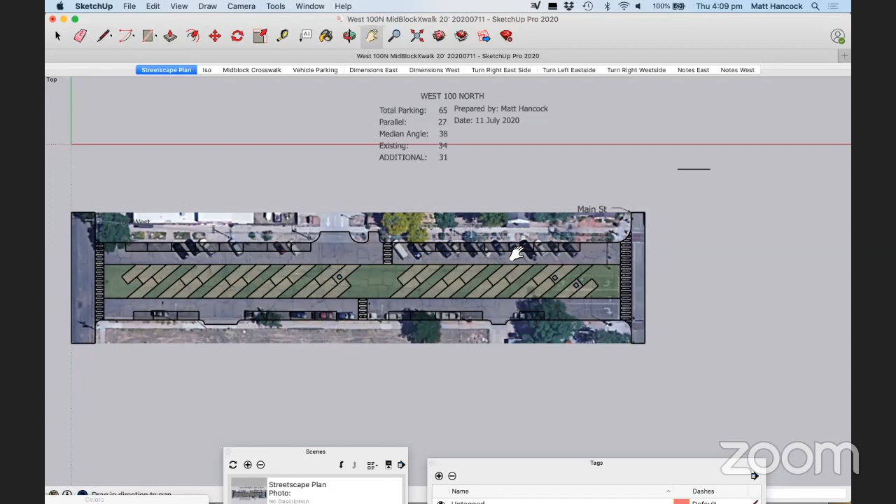This is the food truck park. It has its main access point on 100 West, but it does have this access point here. This is the laneway behind Main Street, and I was wondering if just not having dual access was a problem. They do abut the parking lot, so they could be provided with one-way access, if that becomes problematic. And this residence here, they have access to the rear lane behind the Love Muffin there that accesses onto Main Street and 200 North. So that may somewhat alleviate some concerns about access.

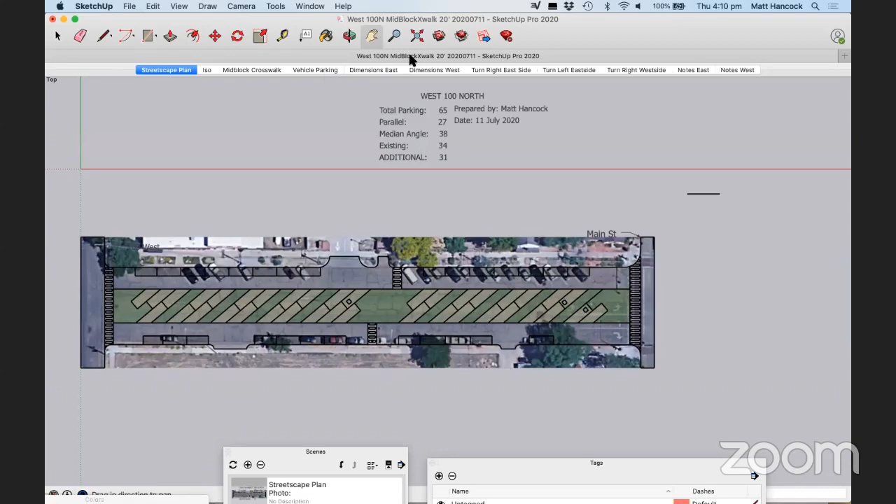And we see that on many of our other side streets, that many places have multiple access points onto other blocks. Questions? No questions?

Again, I mean, this parking is fairly generous, 23 feet, 22 and a half feet, 70 feet. These are 2 turn lanes. This distance here would only be 20 feet, but again, Multimodal Networks talks about lane widths.

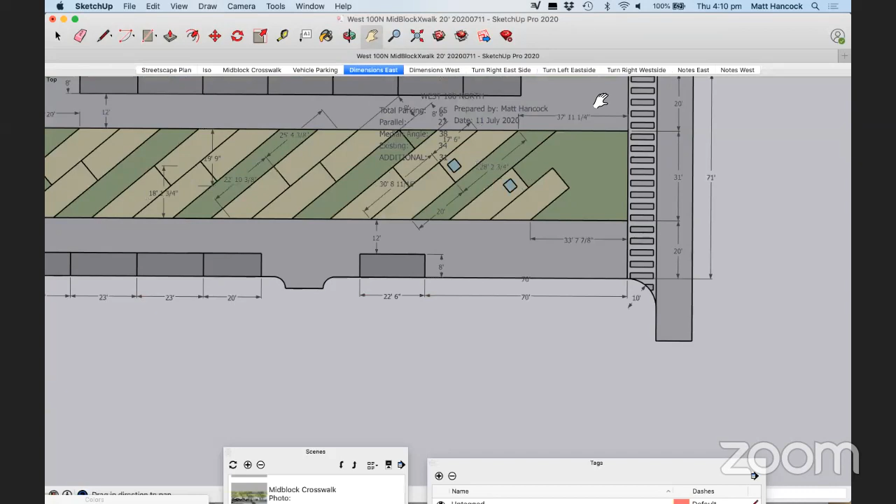And in that it says, there's one quote that says lane widths of 10 feet are appropriate in urban areas and have a positive impact on street safety without impacting traffic operations. So that again gave me the courage, if you like, to say a 10 foot wide travel lane isn't necessarily a problem, as we've seen in Lancaster and as Multimodal Networks would suggest.

So I think the bottom line is that obviously Chuck and us have been working, and I think we all kind of are on the same page that there is a fair bit of scope for providing additional parking on our side streets. That also prioritizes other road users, and I think it's all very encouraging. And I hope it would receive a high level of support from both the business community and the broader community at large.

So where do we go from here? I'm asking that to the group. To the group, Nora, or to me? To the group. Now that, you know, we've seen these, I think we are headed in a good direction. What do we do now?

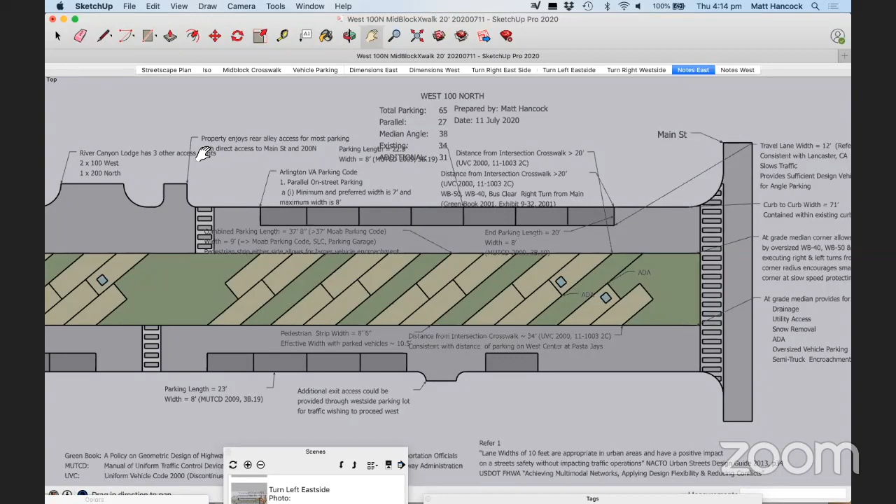I think we also have to, one of the things that's different between your design and mine is you get closer to the side streets than I do, because I tend to like to preserve the turn lanes. And I think that we can address that with some more analysis on whether or not the turn lanes need to be there. So I guess what I'm really saying is, I think we need to identify some more constraints, fine-tune the design more adequately. Even drainage should be considered at some level, not 100% design level, obviously.

And then we'd have a better idea of how we'd tweak these designs, for lack of a better word, and then be able to put cost to it. That's the way I would approach it. I don't know what anyone else would suggest.

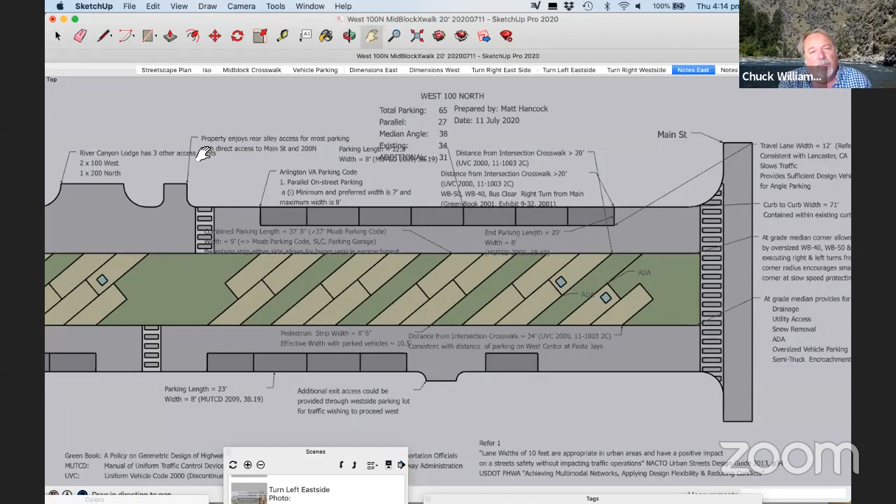Hey Chuck, how much time should I account for between now and when we can all follow up as a group and review the results of that analysis and assessment? What's a good window to work with there? 2 weeks, 3 weeks? What do you think?

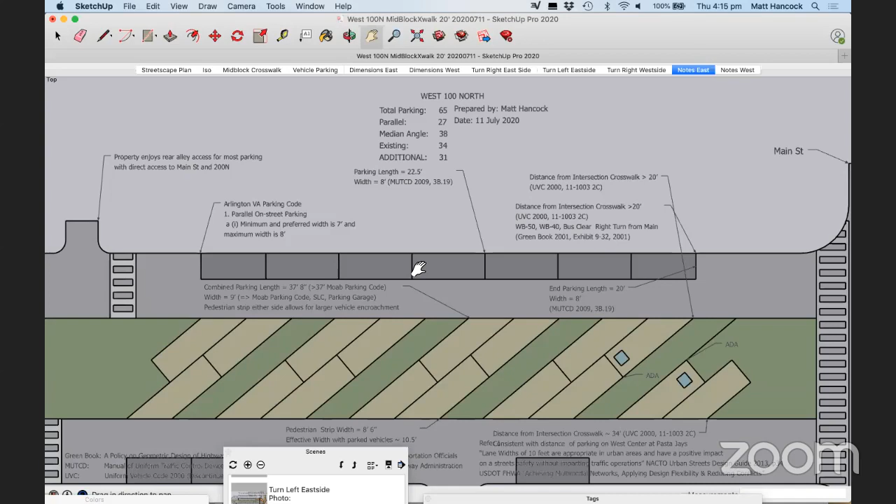I really think it's 4 weeks. I mean, it's still just me and Mark right now, and there's a lot going on, believe it or not, in this little sleepy town of Moab. But I think, Carly, that's what I committed to before, wasn't it? About? Yeah, that's right.

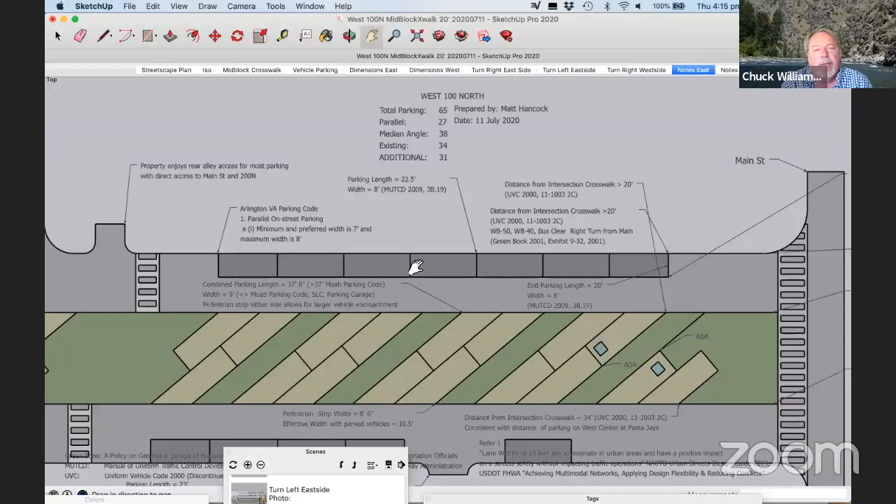So I'd like to have a month. I'd like to do some iterations back and forth with Matt, maybe, now that I've got your PDFs of your drawings, Matt, available. I can download it. So that's my belief, Curtis. That's about the best I could do. I don't know about Matt.

What are you thinking? Oh, I'm thinking exactly the same thing. There's issues around, and, you know, my goal here hasn't been final design, but a demonstration of concept, but there's other considerations. As Chuck has mentioned, there's street poles. If you've got a vehicle here, you've got other trees, other considerations, and I think there's solutions to all of those, but it would be remiss not to have at least acknowledged those issues and look at the degree to which they would have an impact.

And as Chuck said, we've got utilities under much of this. It's part of the reason why I like the at-grade design, because I know the sewer here runs around this location here. It runs about there, which is great, but that's just sewer, and then you've got the connector lines. But there's all of those issues to consider.

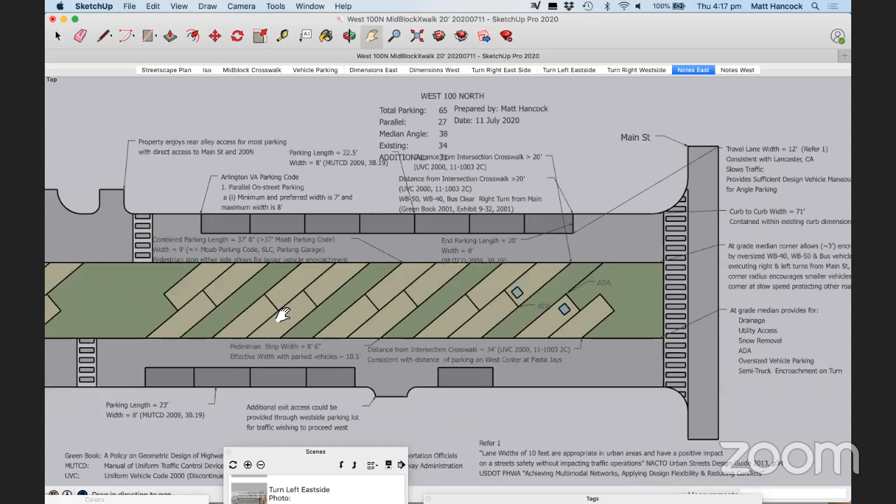And then in terms of costing, I guess it's a question of priorities and what the ultimate design would look like. And I think that, in order for this to really be effective, it has to have a certain design threshold. But again, that's not my place to comment on really. But I agree with Chuck.

Any design that would go forward as an initial concept needs to identify that extra level down of detail—okay, if this goes here, then what does it do to this power pole that's right here? That sort of thing.

So we'll tentatively plan for our next regular meeting on the 26th of August, which is 4 weeks from today. In the meantime, now that we've got 2 extra months to work with, I'll work with Carly to update our framework so we can get an idea of when we feel we'll be wrapped up on this. Then the committee will need to shift back to what other projects remain that we want to include in our proposal.

And it'd be great if we could spend at least a month on those, if that's what the committee decides to do.

So do you think we would be on track to have a concept design and budget on this project finished by September 1st? Are you, who are you asking, Curtis? You and probably you. If we're talking about the parking scenario that we've just been discussing, yes. Yes, okay, yeah, that would be great.

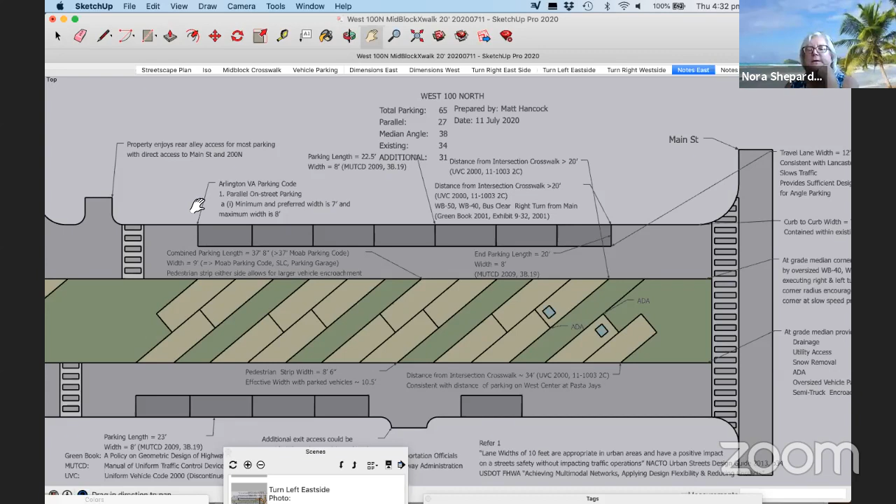So I think it will be really important, once we put this out there, to write preliminary, concept only, all over it in big letters. I think words like preliminary and conceptual are important in the messaging of this, and it reinforces exactly what we're trying to convey to the public, which is this isn't fully cooked. We are coming to you early, wanting your input and engagement to help us design this. So I completely agree.

Chair Wells, may I say something? Please. I am all for early public engagement, I think that's a good idea, good planning, best practice. But when we started this process, I was under the impression that we were going to present a package of projects to UDOT, and I would just as soon see the package go out all at one time rather than just one project.

No, I mean, I think we're definitely committed to the meat and potatoes of our package, which is our parking project. But we have discussed the northern portion of the multi-use pathway as being a component. That's something that by all means should have its time and place in the public engagement piece. That's a pretty significant project, and we still have a lot of discussion there. There were issues about easements and segments that were of concern.

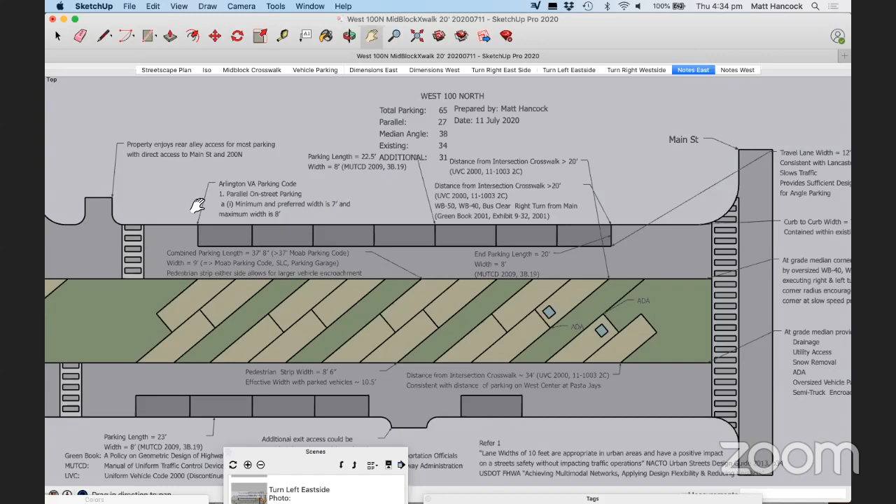And so what do you think about that as far as a timeline and a framework to work public engagement on these other potential pieces to the package?

So here's what I envision. There's a slight logistical issue because it's my understanding UDOT was waiting for us to finish this off Main Street parking concept so they could do their Main Street improvement model. So they need us to finish this before they can move forward and fully develop that concept. And if we want to get public engagement on this early, we need to do it now.

Now, what we can do, the paths that I see: we fully cook this, get the off Main Street parking concept to the place where all the other projects are, because they've all existed before this committee convened. The shared use path has been floating out there for a while, the Main Street improvements, the South recreational vehicle parking has been a concept. This is a brand new one that we're developing. So we could hold off public engagement and let them all get evaluated at the same time, but you'll miss out on having public engagement early on for the off Main Street parking concept.

Another option is we get public engagement early, cook this concept as best we can, and then trot all 4 or whatever the number of projects is out for engagement, and either just determine overall favorability for each of them, which ones are most important to the community, or get some meaningful feedback on specific components of those projects. But it feels like those ones are so much further down the road than this off Main Street parking. So that's why I had in mind sort of a sequential, evolving public engagement strategy.